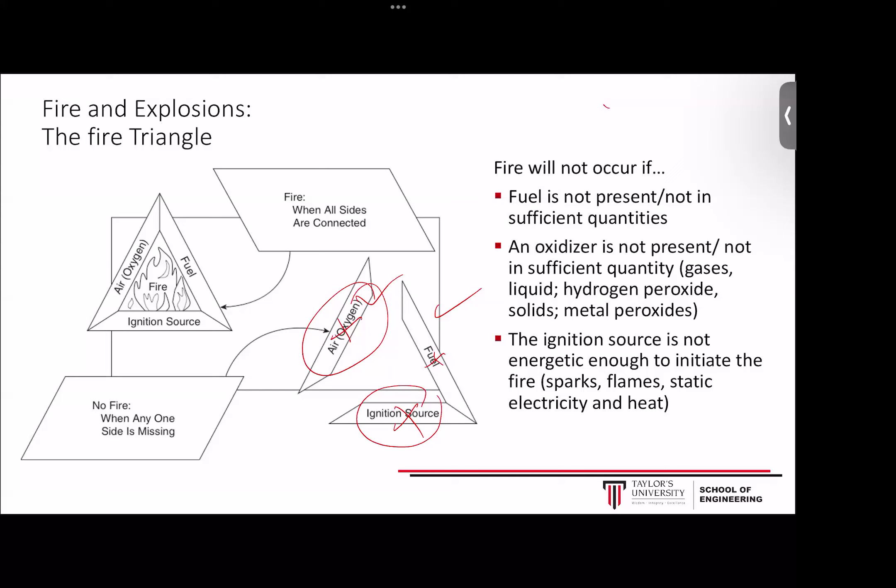So the difference between fire and explosion is that fire actually burns slow compared to explosion. Explosion is where the moment it started, what causes the damage is not the fire, not the burning, but the overpressure. It's caused by the pressure, okay? So fire releases energy slowly, explosion releases energy in an instant.

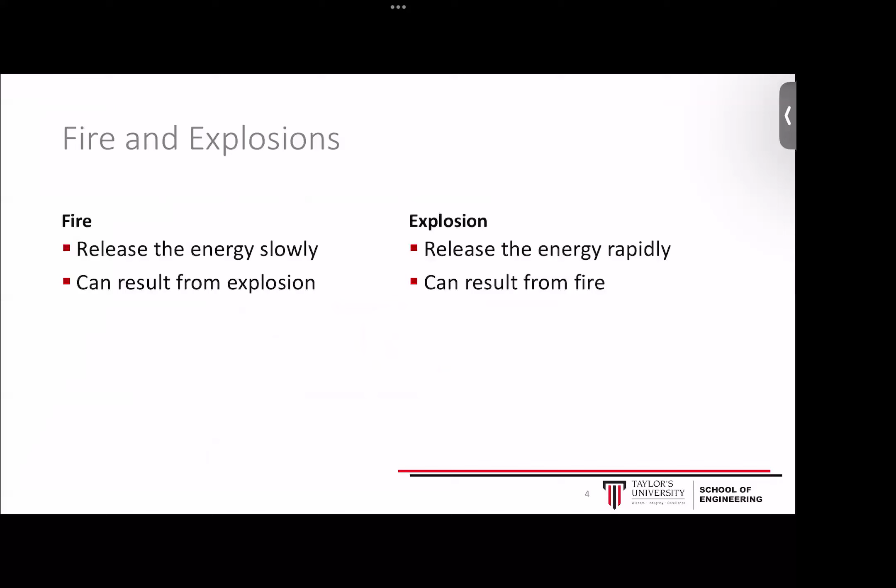Okay, so fire can result from explosions and explosions can result from fire. So they go hand in hand very often. Fire is a chemical reaction between substance and oxidants that releases energy.

And ignitions - something I want to bring to your attention is the auto ignition temperature, AIT, which is the certain temperature where the substance has enough energy to start a fire - you don't need a spark to start a fire. The fuel itself has enough energy to burn by itself.

So the flash point of a liquid is the lowest temperature where it starts to give off vapor to form the ignitable mixture with air.

Okay, so you have seen in your SDS, the ones that we already looked at - if you go to the fire properties, it will tell you the flash point, and for some substances, if they have the AIT, they will also tell you what the AIT temperature is.

Please pay attention to that, because I have seen students when it comes to their capstone design - your group projects 1 and 2 - since most of you chemical engineering students are taking this module together with your process plant design economics. Next semester you will start to design a chemical plant that's given to you. So I have seen students where they wanted to run their reaction at, for example, 400 degrees Celsius.

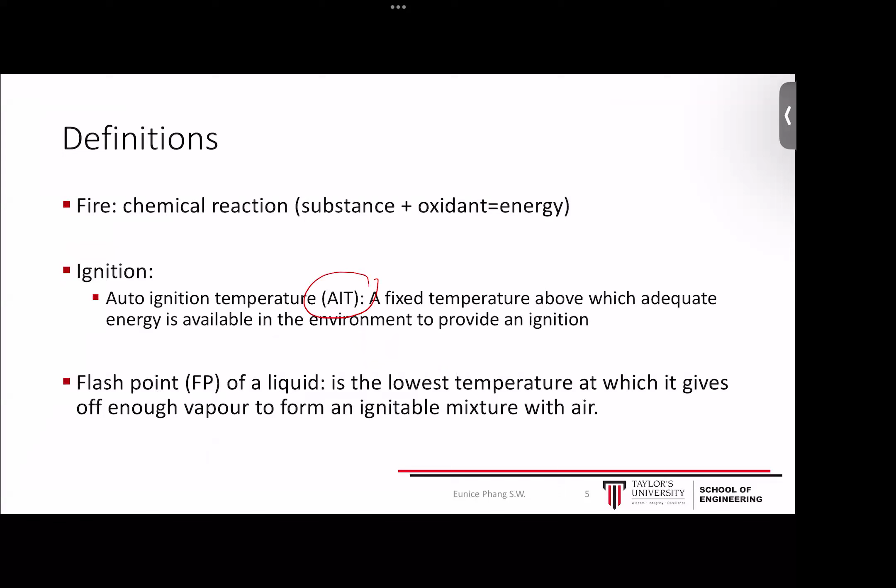Hold on, give me a minute, because I think I hear my son.

Okay, so there are lots of different types of explosions. When we say general explosions, it talks about chemical reaction explosions. But there are also things like mechanical explosion due to pressure buildup.

And also we have something called confined explosions, where it's within the building or within what we call the blast wall. And also the boiling liquid expanding vapor explosion - a very long, lengthy word for explosions that in general we call BLEVE.

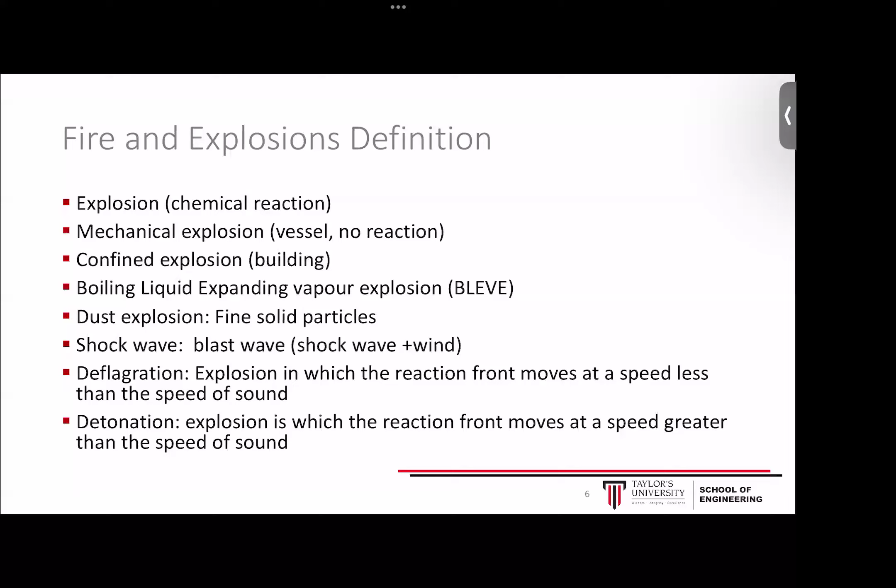Or dust explosions, which later we have videos talking about what dust explosion is. Even fine dust, when you accumulate enough of it, has the potential to cause explosion. And what's shockwave, and deflagrations and detonations, etc. So these are just basic fire and explosion definitions.

Okay, so let's take a look at this chemical reaction explosion that we had here. Just give me a moment to reshare the screen here.

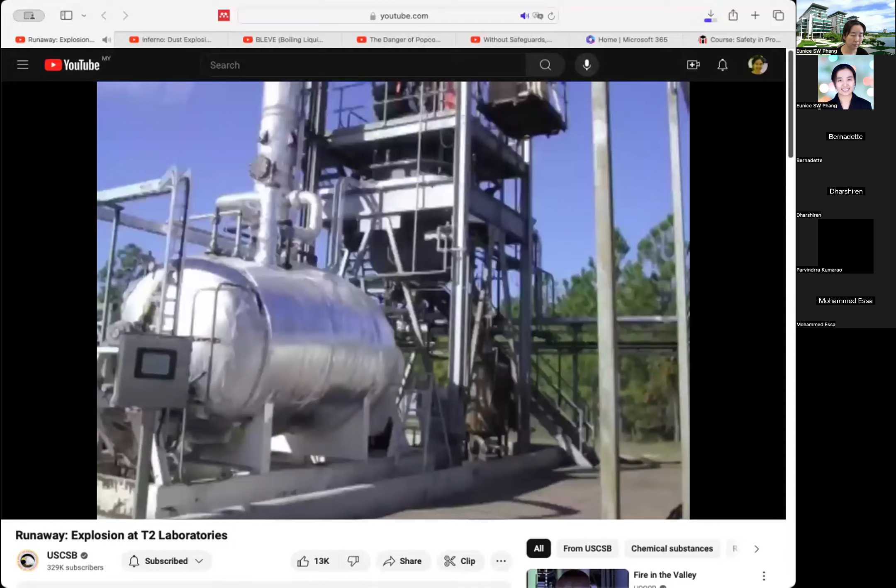Behind me on this concrete pad, there used to stand a structure some 50 feet high that had a reactor vessel in it, in which the company that operated here, T2 Laboratories Incorporated, manufactured a chemical known as methylcyclopentadienyl manganese tricarbonyl, or MCMT for short. The entire structure and reactor vessel were blown away in the explosion.

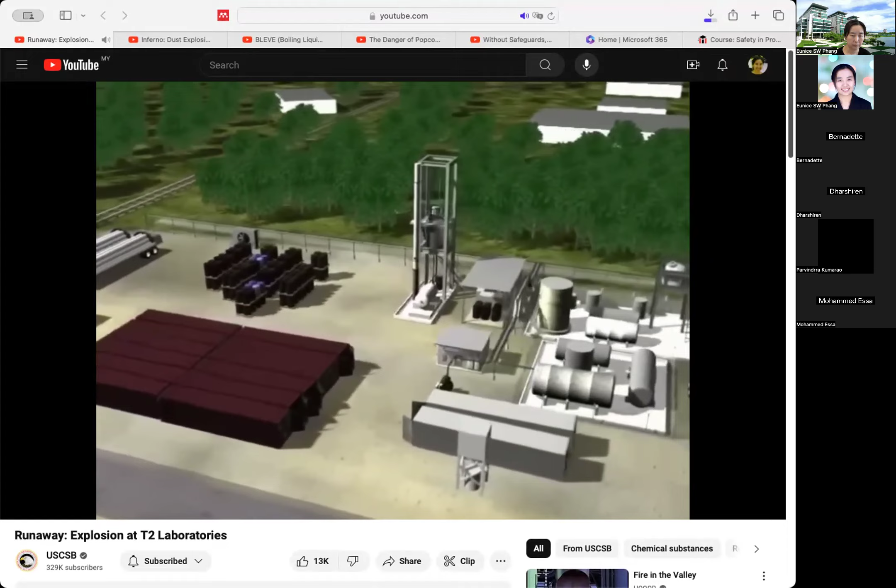T2 produced MCMT, a gasoline additive, in batches using a 2,500-gallon reactor. An operator controlled the process with a computerized system in a nearby control room. In the first step, liquid chemicals and sodium metal were loaded into the reactor, heated, and then mixed with an agitator.

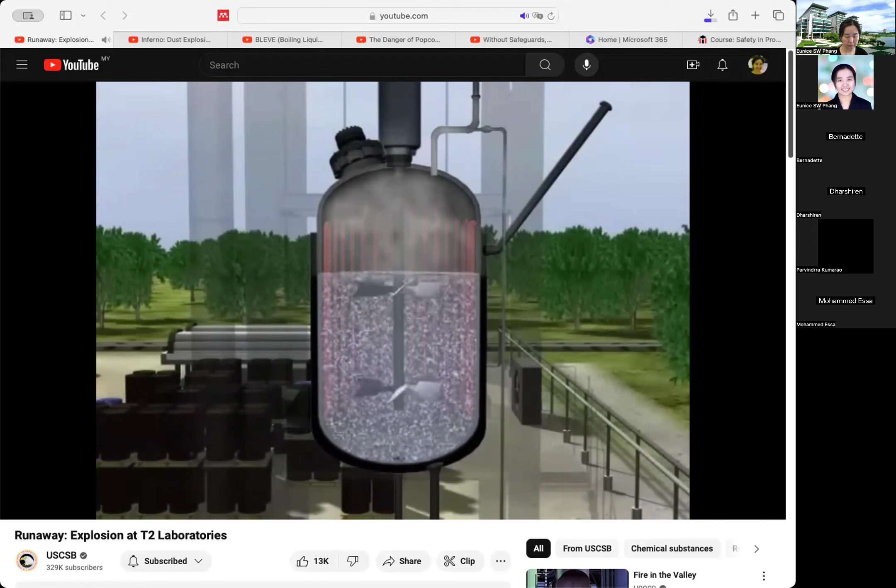The reaction produced hydrogen, which was vented to the atmosphere. In normal operations, when the temperature reached 300 degrees Fahrenheit, the operator would turn off the heating system. But because this reaction was exothermic, or heat-producing, the temperature inside the reactor would continue to rise. At 360 degrees, operators would begin to periodically fill the reactor's cooling jacket with water. As the water boiled, heat was removed, controlling the temperature.

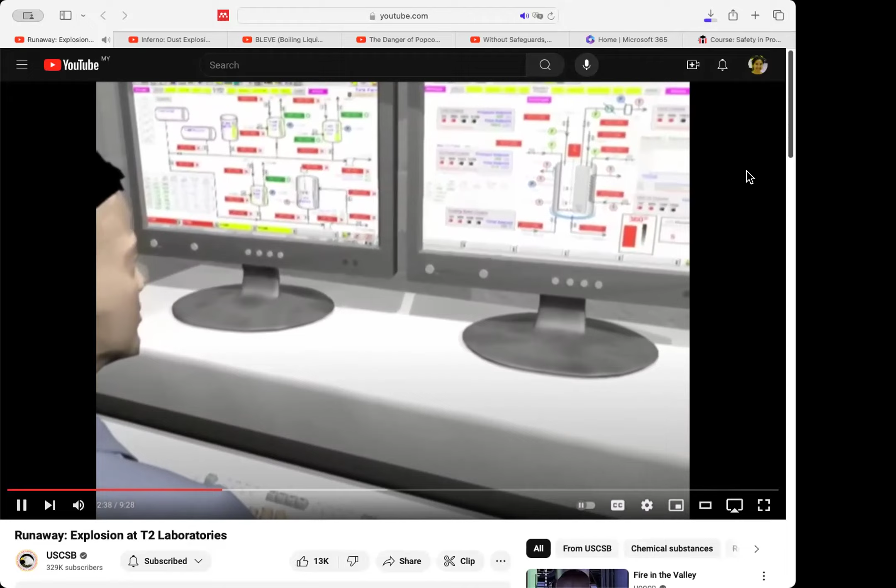However, on the day of the accident, the CSB found that the operator tried to cool the reactor as usual, but the cooling system likely malfunctioned, perhaps due to a blockage in the water supply piping or a valve failure. The temperature and pressure inside the reactor began to rise uncontrollably in a runaway chemical reaction.

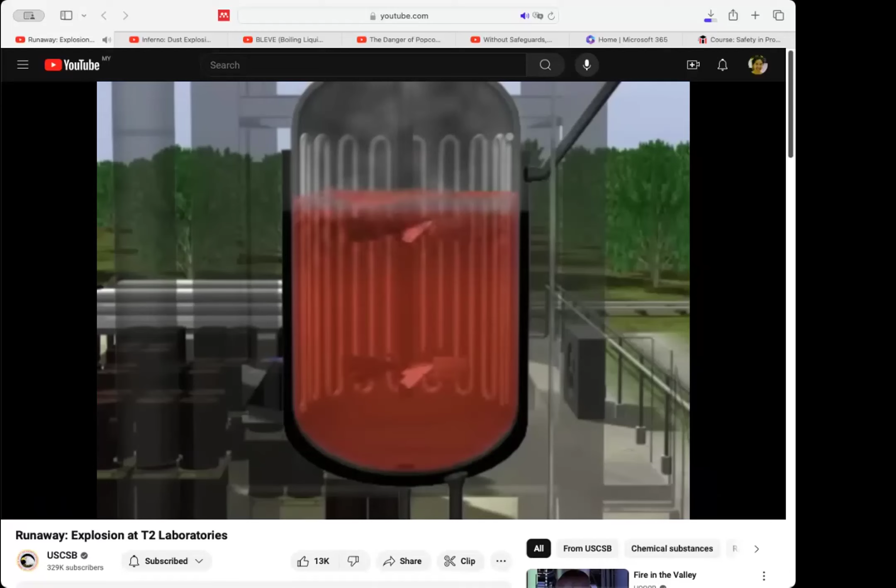T2's co-owners returned to the plant after a worker called to report the cooling problem. While one owner searched for the plant mechanic, the other went to the control room. Concerned about a possible fire, he warned employees to move away from the reactor.

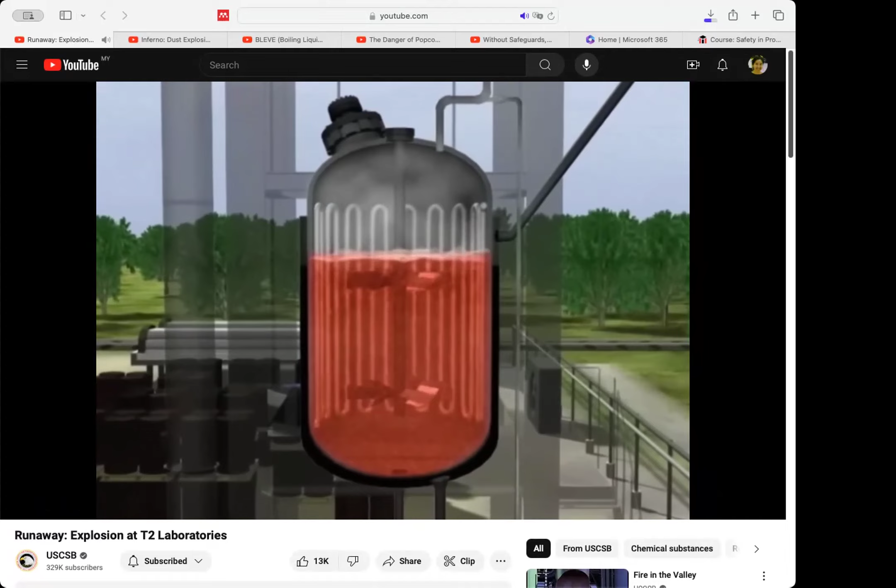Inside the reactor, the pressure was still increasing, reaching 400 pounds per square inch and bursting the rupture disc. Witnesses heard a sound like a jet engine as high-pressure gas began to vent from the reactor. But it was too late. Within 10 seconds, there was a massive explosion, equivalent to about 1,400 pounds of TNT.

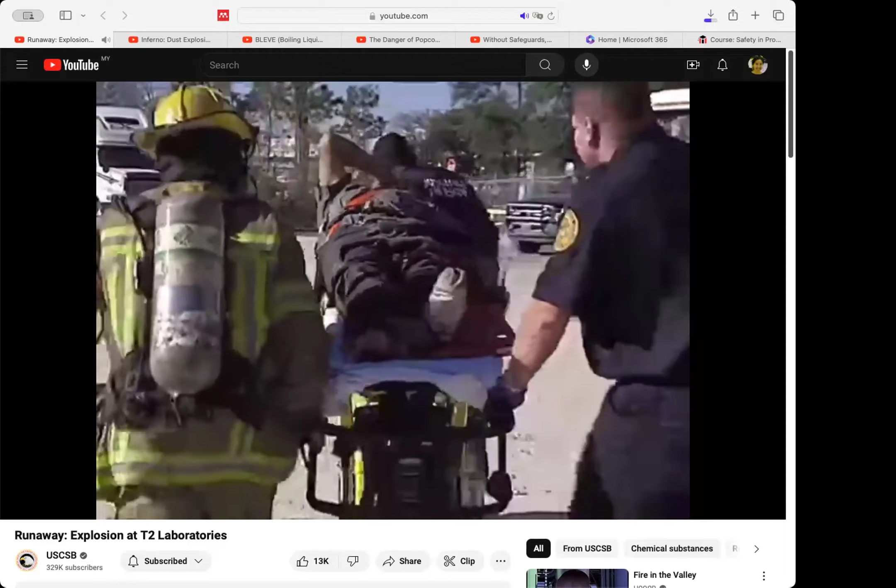The blast damaged buildings over 1,500 feet away. Debris rocketed up to a mile. The co-owner and the operator in the control room were killed. 2 operators further away died from flying debris. 32 other people were injured, including 28 at nearby businesses.

This facility housed multiple types of chemicals. That was a kind of a mass storage of everything you can think of, and it was all mixed together and it was all burning together. And for our perspective from the hazardous material side, it makes kind of a worst case scenario.

Damage from the explosion was so severe, 4 nearby buildings were condemned. My office personnel heard a whistling sound in the area, and as they looked out the window, they saw an orange glow, which was the blast coming off of the explosion, and it came to our offices and it blew in all the windows in our office trailers. Immediately it was a shock or a surprise, and then all of us were shaken afterward.

In 2002, the CSB completed a study on reactive chemical hazards. The study identified 167 serious accidents involving uncontrolled chemical reactions between 1980 and 2001, causing 108 deaths and hundreds of millions of dollars in property damage. When mixing chemicals that have an exothermic reaction, you need to be aware of the amount of energy that could be released by the reaction to prevent vessels from bursting like the one that happened here.

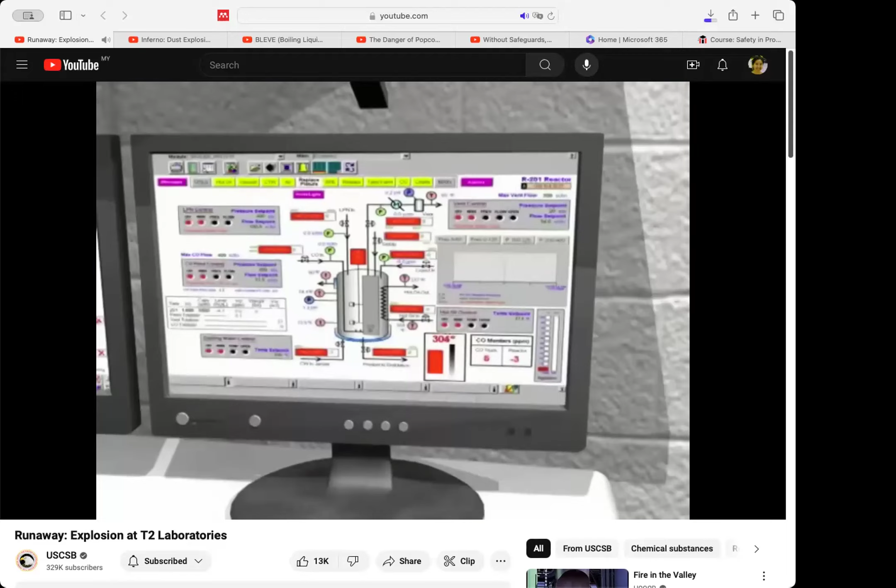T2 developed its MCMT process using a 1-liter reactor. The company then scaled up the process directly to full production volume in the 2,500-gallon reactor. After 3 batches, T2 increased the batch size further by 1/3. As the scale of the reaction increased, effective cooling became ever more difficult.

During 175 production runs making MCMT, T2 periodically experienced problems, such as unexpected temperature increases, but the company never fully investigated the causes. And T2 had only equipped the reactor with a simple cooling system using city water. When the system malfunctioned, there was no backup cooling immediately available to control the reaction.

The most important thing to managing reactive chemistry hazards is that you have to have a thorough and complete understanding of your chemistry under design conditions and also under all foreseeable abnormal conditions.

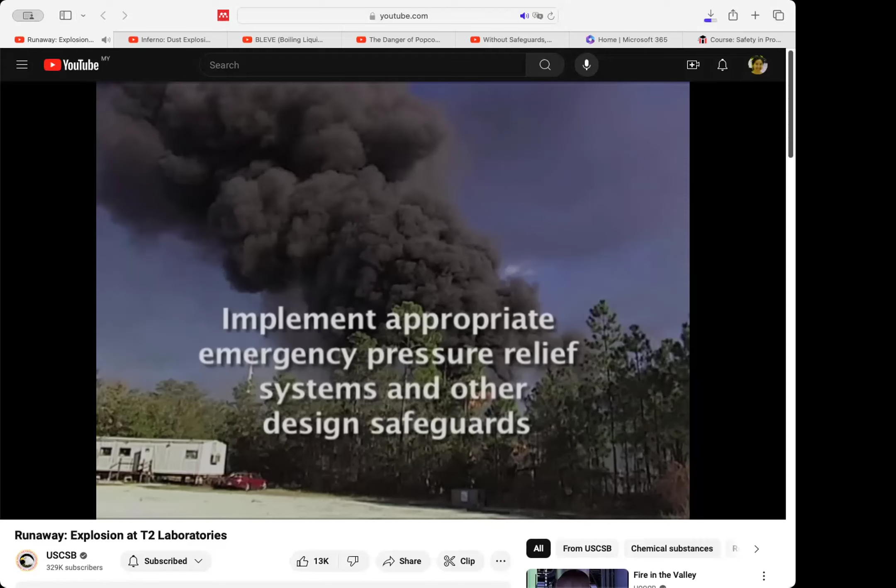The CSB has noted that to prevent reactive chemical accidents, companies should identify and thoroughly evaluate reactive hazards in their processes, implement appropriate emergency pressure relief systems and other design safeguards, develop effective operating procedures and training programs, and carefully manage any changes to existing processes, and plan for possible accidents, including evacuation drills and emergency response exercises.

Although T2's owners had undergraduate degrees in chemistry and chemical engineering and experience in the chemical industry, neither had been trained on how to recognize or control reactive hazards.

A large portion of the incidents have occurred because the people who were actually running the process were not aware either of the existence of the reactive chemistry hazard or of the potential magnitude of the consequences associated with that chemical reaction hazard. So a lot of the problem, I think, is education and awareness.

The board noted that multiple sources of information are available on how to control reactive hazards, including publications from the Center for Chemical Process Safety, the Design Institute for Emergency Relief Systems, and the UK Health and Safety Executive.

Following the T2 investigation, the CSB recommended that the American Institute of Chemical Engineers work to incorporate education about reactive hazards into college-level chemical engineering curricula.

Reactive chemical hazards continue to be a too frequent cause of chemical accidents. Improved industry practices and increased education will help prevent these tragedies.

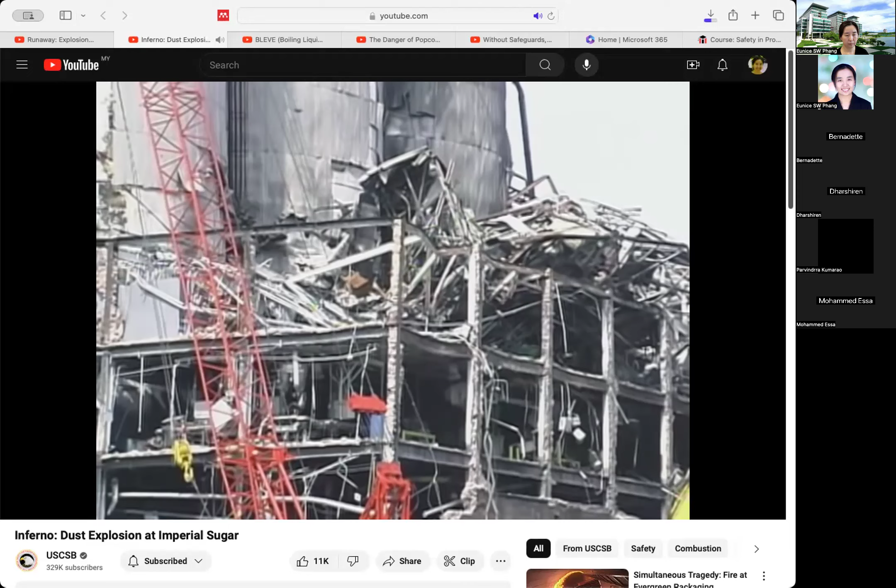At 7:15 p.m. on February 7, 2008, a series of violent sugar dust explosions devastated the Imperial Sugar Refinery in Port Wentworth, Georgia, just outside Savannah. Explosions raced through the buildings, fueled by accumulations of combustible sugar dust and sugar that had spilled from equipment. Thick concrete floors heaved up, and brick walls were blown into stairwells and work areas, blocking many exit routes. Fires spread rapidly.

8 workers died at the scene. 6 more died later at a regional burn center. Dozens of others were injured. The plant's massive sugar packing buildings were a total loss. The accident at Imperial Sugar was the deadliest industrial dust explosion in the United States in decades. It highlights the extremely serious nature of combustible dust hazards. There were significant accumulations of sugar dust and spilled granulated sugar on surfaces throughout this facility. Conditions were set for a catastrophic accident.

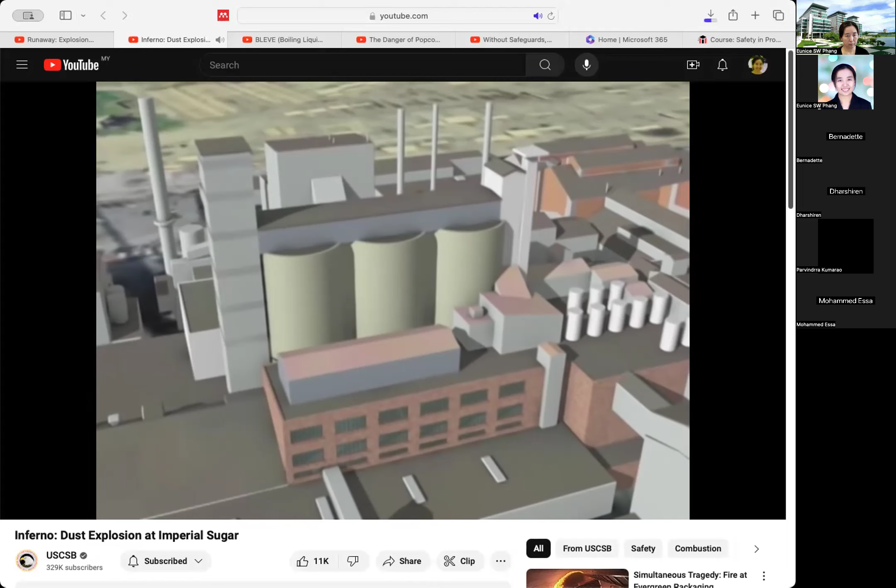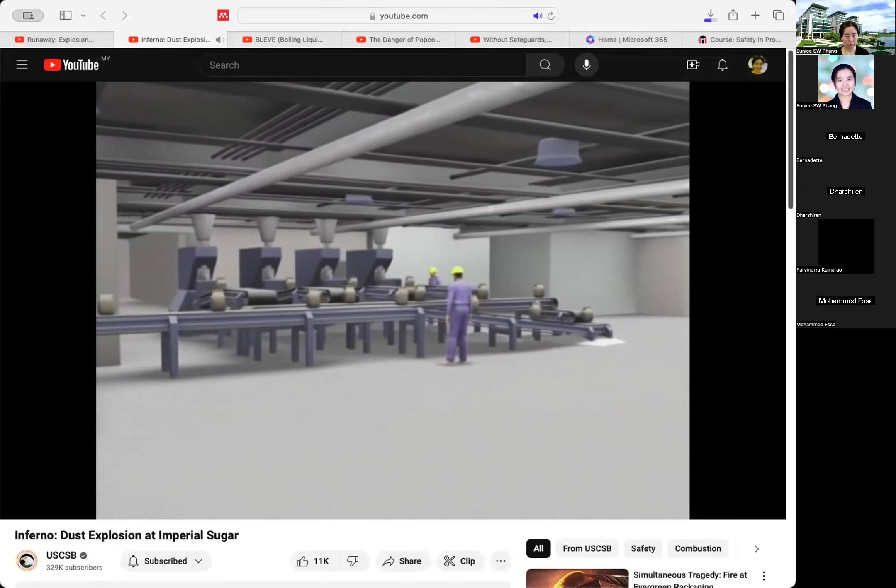Imperial Sugar's sprawling Port Wentworth complex began operations in 1917 and grew to become one of the largest sugar refining and packaging facilities in the U.S. Granulated sugar from the refinery was stored in 3 105-foot-tall silos and then conveyed into packing buildings where it was packaged for distribution. Granulated sugar was also converted into specialty products, such as brown sugar and powdered sugar. Sugar was transported by a complex system of bucket elevators, screw conveyors, and conveyor belts.

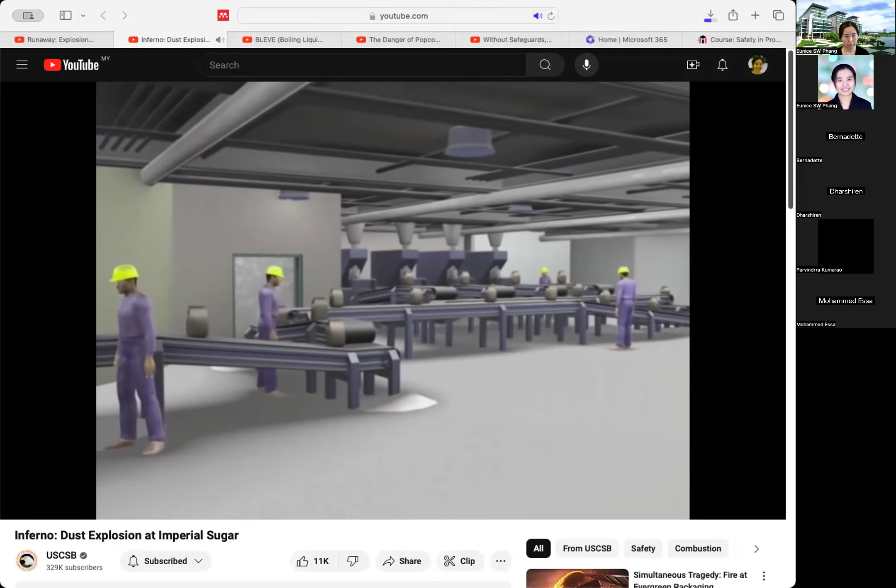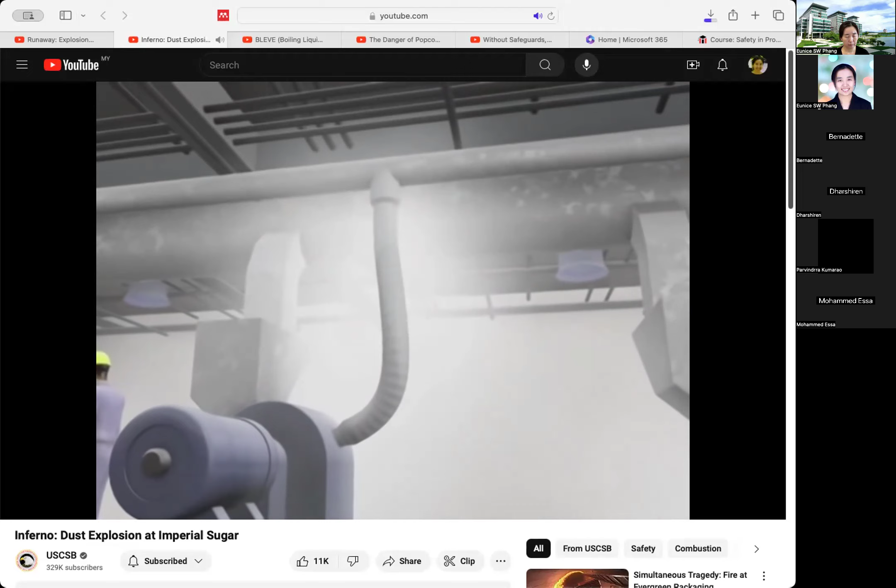During this process, sugar spilled onto floors throughout the work area. In places, the spilled sugar was many inches deep. This sugar also contained fine particles which became airborne. In addition, hammer mills were used to crush the granulated sugar into powdered sugar, creating even more dust. The machines were connected to a dust collection system, but it was undersized and in disrepair. And it was not connected to the bucket elevators and conveyors.

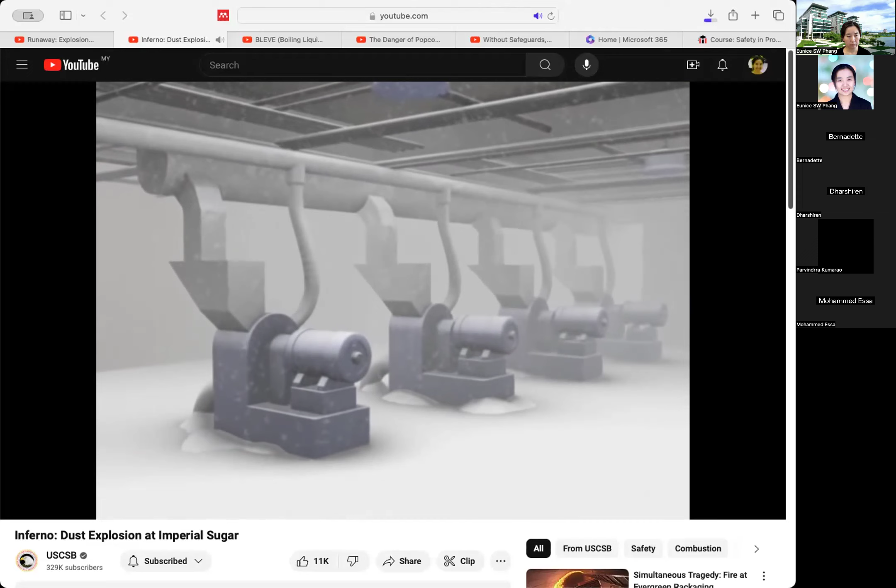Significant amounts of sugar dust escaped into the work areas. Workers routinely used compressed air to clean packaging machines, further dispersing sugar dust throughout the buildings. Over time, large amounts of dust accumulated on elevated, hard-to-clean surfaces, such as ducts, beams, and light fixtures. These surfaces were not cleaned often enough to always keep the dust below hazardous levels.

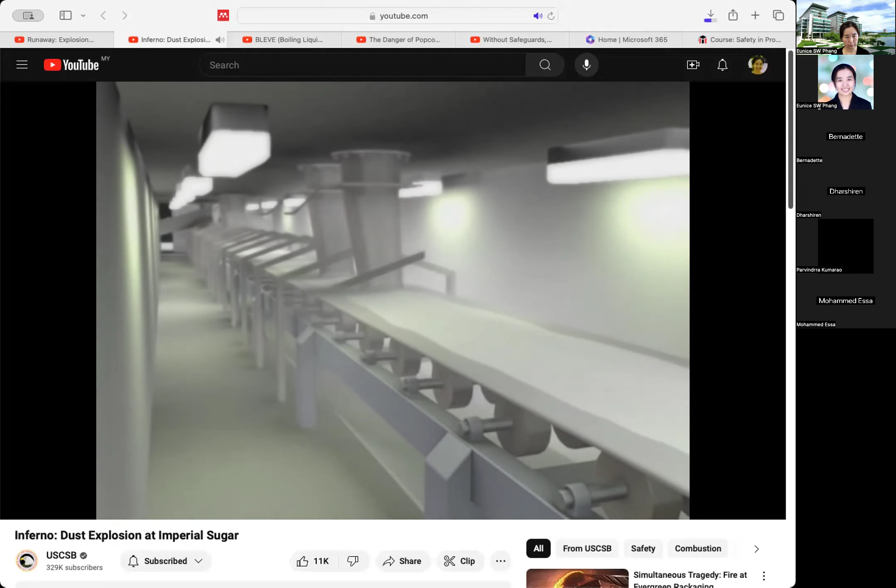However, in 2007, the company enclosed the conveyor belt with stainless steel panels to protect the sugar from possible contamination. The enclosure was not equipped with a dust collection system. As a consequence, sugar dust would now be trapped inside this enclosure.

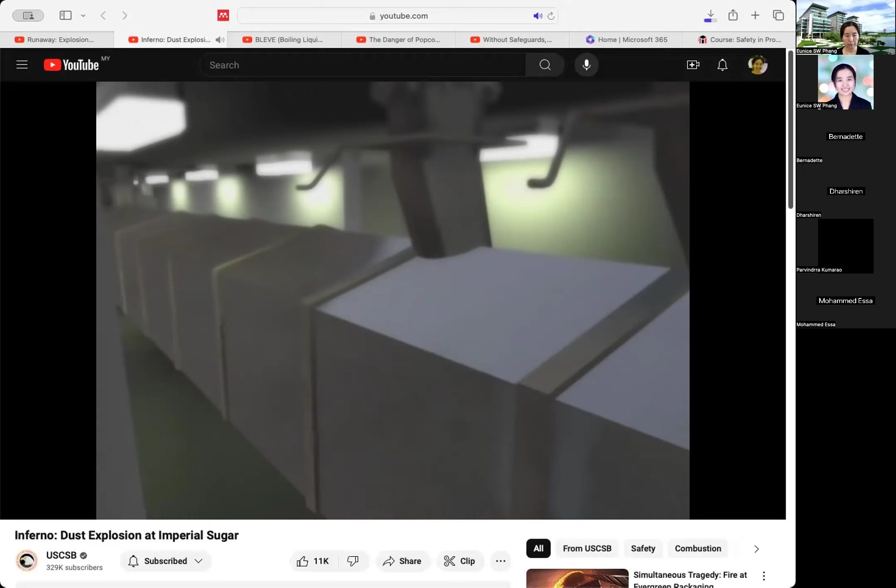On February 7, 2008, clumps of sugar were found blocking one of the discharge chutes. Sugar from the adjacent silo likely spilled off the moving belt. Dust likely accumulated to an explosive concentration inside the enclosure. At about 7:15 p.m., the sugar dust contacted a nearby ignition source, likely an overheated bearing, and exploded.

This primary explosion blew apart the enclosure and vented into the packing building. Accumulated sugar was lofted and ignited by the advancing fireballs. The dust clouds fueled a chain reaction of secondary explosions, which swept through the buildings. Concrete floors buckled, releasing tons of granulated and powdered sugar into the flames.

Emergency evacuation drills had not been conducted, and the explosions had cut the power to much of the interior lighting. In the maze of darkened and damaged stairwells and passageways, workers desperately tried to flee the growing inferno.

The CSB found that correspondence dating back to the late 1960s showed that plant managers in Port Wentworth were aware of the explosive nature of sugar dust and the danger of dust accumulations. As far back as 1967, a memo described a sugar dust explosion that heavily damaged the powdered sugar mill room. Despite the long-standing awareness of the explosive nature of sugar dust, not enough was done to manage the hazard.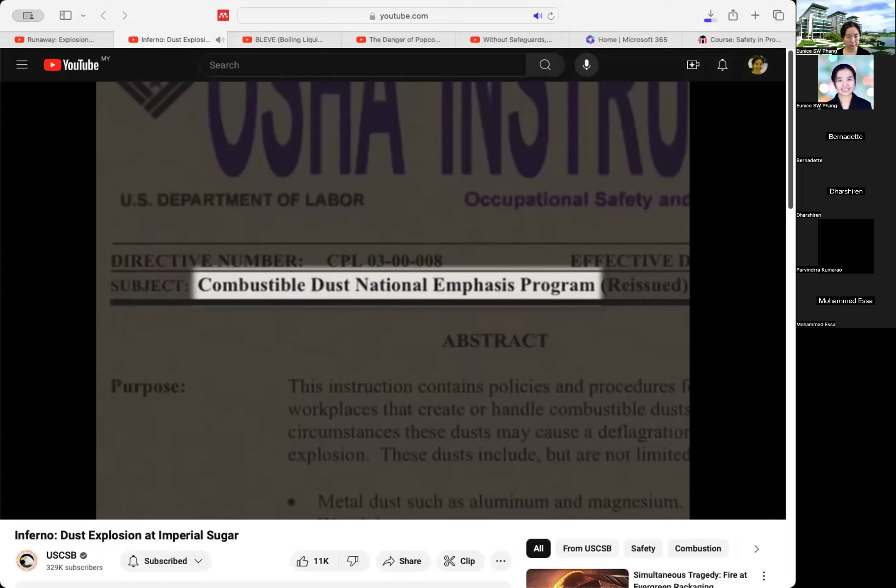In 2006, the CSB issued a study of combustible dust, which called on OSHA to establish a comprehensive combustible dust standard based on the current standards of the National Fire Protection Association, or NFPA. In October 2007, OSHA began implementing a new national emphasis program to increase the enforcement of existing regulations related to combustible dust. Imperial Sugar learned of the OSHA Combustible Dust National Emphasis Program 4 months before the devastating explosion at Port Wentworth. But management did not act effectively to control the serious dust problem in the packing buildings.

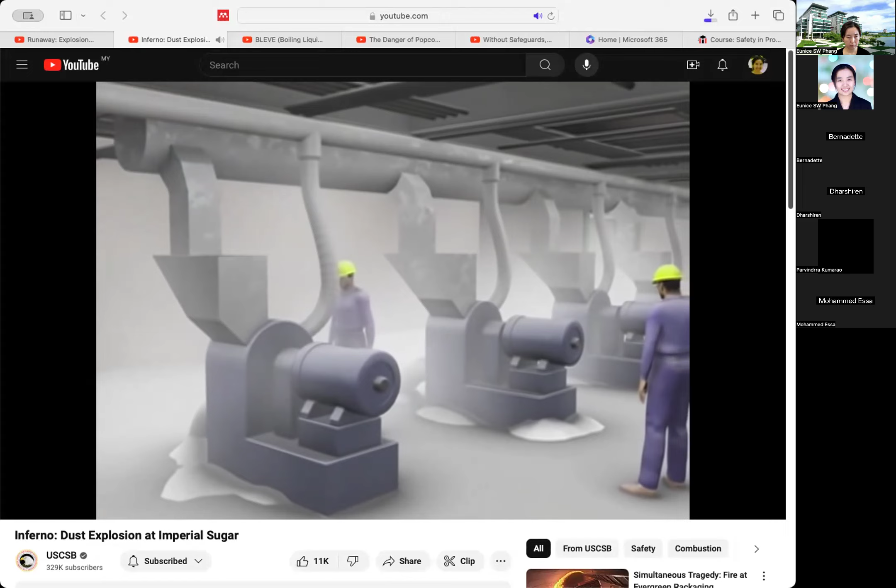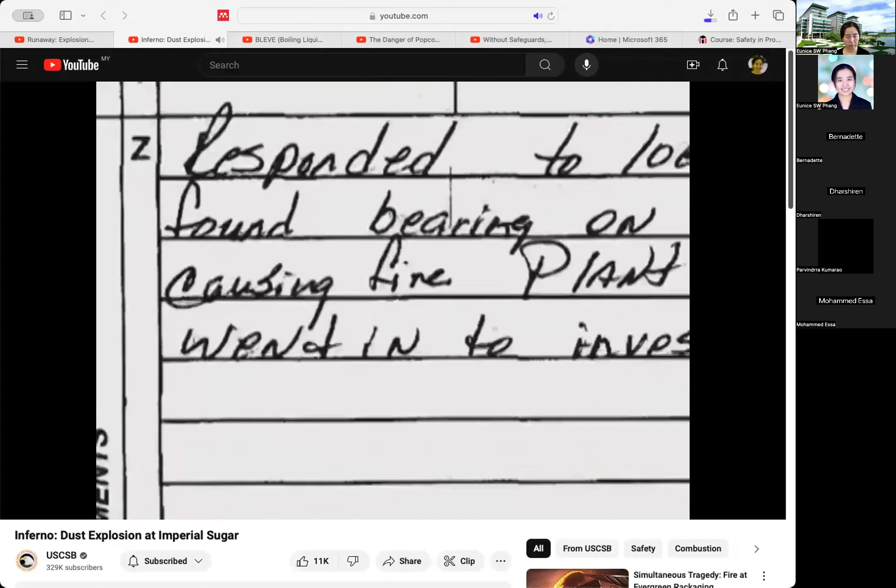Less than 2 months before the disaster, an internal inspection showed that many tons of sugar were still regularly spilling onto the floors. This provided much of the fuel for the massive secondary explosions and fires. The CSB found that over the years, the Port Wentworth facility periodically experienced small fires fueled by spilled sugar and accumulated dust on equipment. But none resulted in a sugar dust explosion that propagated through the plant. Investigators said that decades of operating without a catastrophic explosion may have lulled managers into complacency.

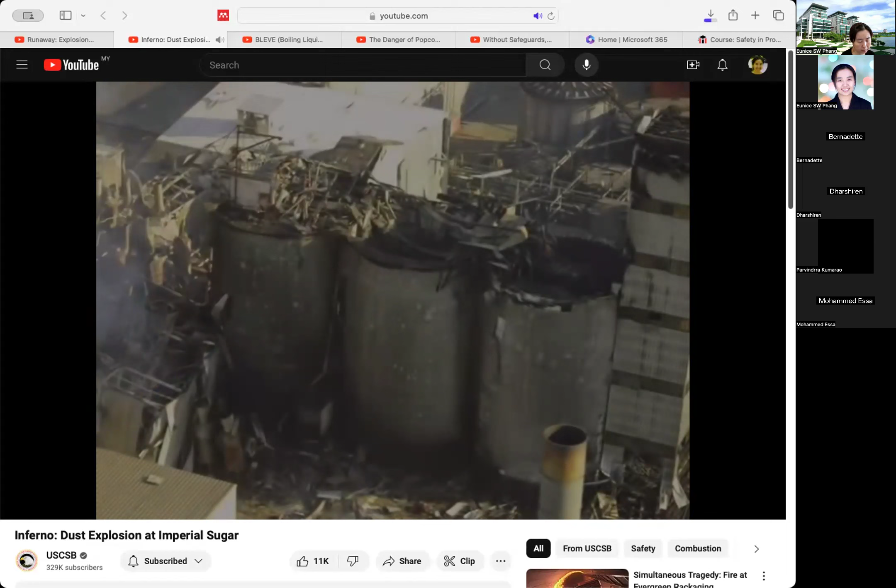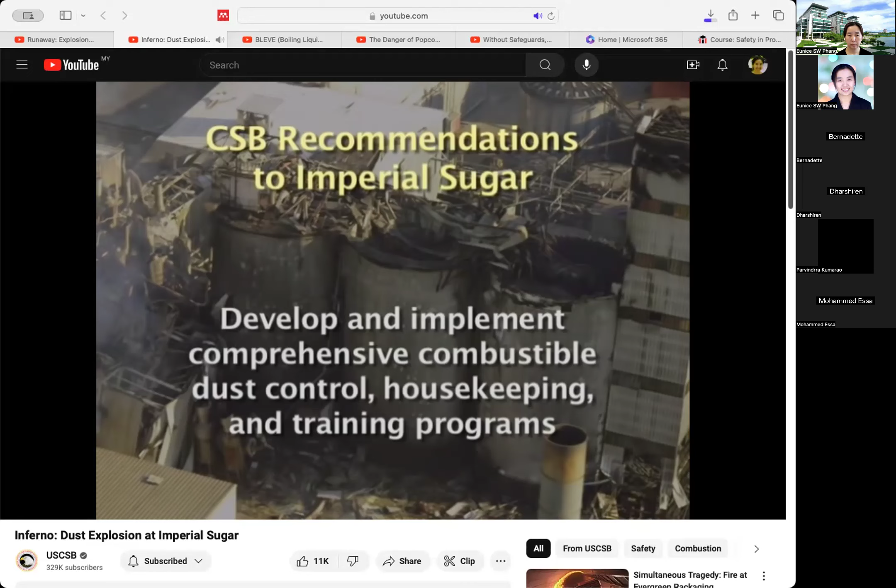In its report, the CSB issued the following recommendations to the Imperial Sugar Company. Apply NFPA standards to the design and operation of the rebuilt Port Wentworth facility. Develop and implement comprehensive combustible dust control, housekeeping, and training programs. Improve emergency evacuation policies and procedures.

Companies can go a long way to control combustible dust within their own facilities by following the existing recommendations of the National Fire Protection Association. But it is also time for a comprehensive federal standard on combustible dust. In April 2009, OSHA announced plans to begin rulemaking on a combustible dust standard for general industry. In its final report on the Imperial Sugar accident, the CSB recommended that OSHA move forward expeditiously with the new standard. Without regulation, enforcement, and education, workers will continue to be at risk from catastrophic dust explosions.

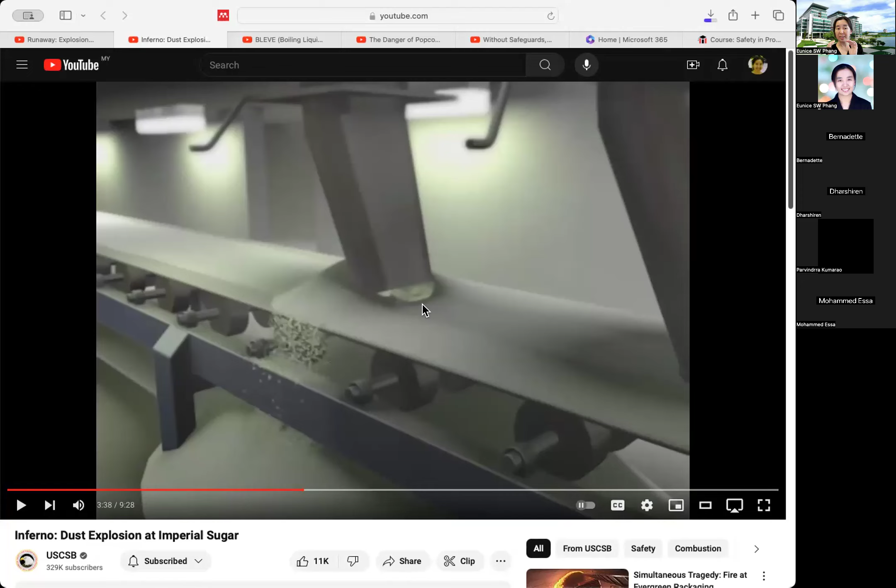So when they put up the tunnels to reduce contamination, what happened is that the dust piled up inside the tunnels, reaching the flammable limits of dust inside this tunnel, to the level of explosive. So the moment they have this clump in there, they suspect the overheating of the belt caused the sparks to happen, because these are all conveyor belts.

So with conveyor belts, as we know, if they continue to run, they start to generate heat, and sometimes sparks may just happen. So that's where the whole explosion started. It's not started by the fire, but it started as an explosion. Okay, so any questions regarding these two?

On the fire and explosions, the explosions caused by chemical runaway, and the other one caused by dust.

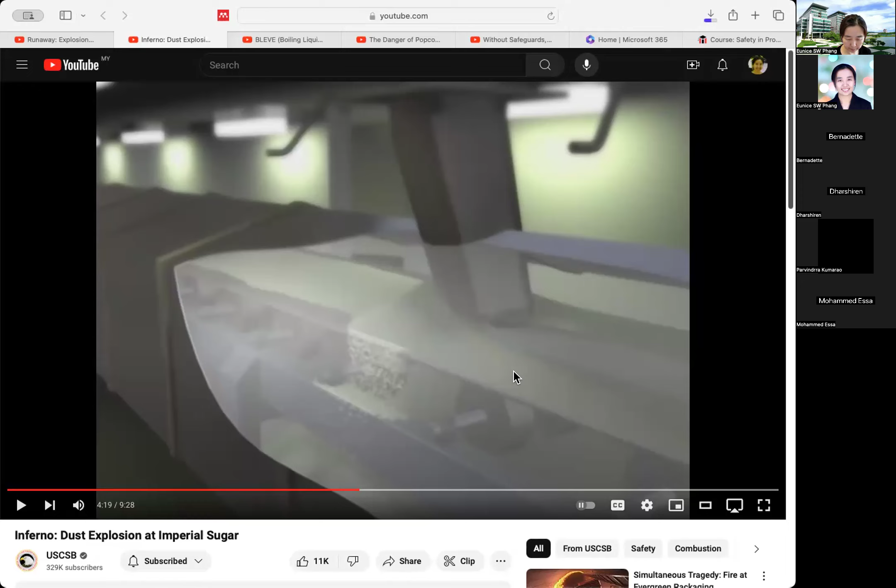Okay, let's see, share device audio. Okay, let's go back to my PowerPoint.

Okay, so just now we viewed the chemical reaction explosion, followed by the dust explosion. A lot of us always thought that only chemicals can start fires, but dust explosions do happen, especially in food processing plants, like flour plants, cornflour, or any processing plant that has fine particles at risk.

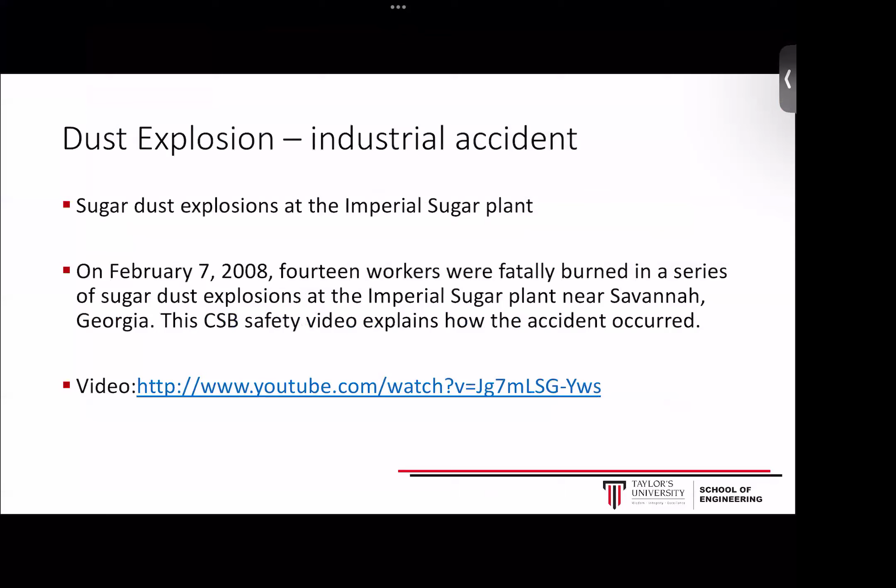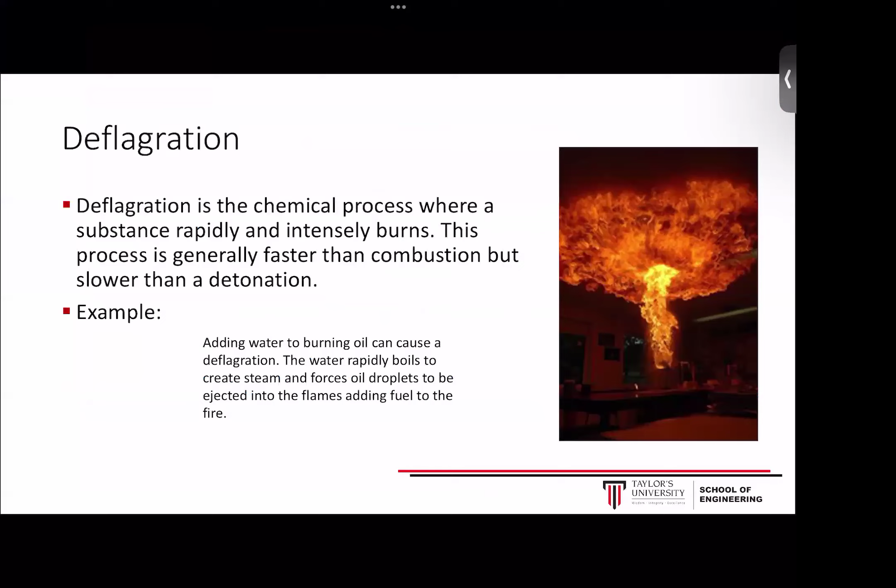Next, we're going to talk a little more about deflagration versus detonation. Deflagration is where there is burning, a fire, and when we add a substance that makes the process suddenly burst out, faster than combustion but slower than detonation. A good example is adding water to burning oil, which can cause a mushroom-like fire. The water droplets get vaporized because of the high heat, and that carries the fumes all the way up. That's what we call deflagration.

Detonation basically is a shock wave caused by the explosion, greater than the speed of sound. Deflagration is lower than the speed of sound; detonation travels faster than the speed of sound. When we look back at these two videos, the moment the explosion happens, it was like detonating a bomb. There's no time for people to react. When there is a fire, there's time for people to evacuate. But when the explosion hits, there's no way people can run.

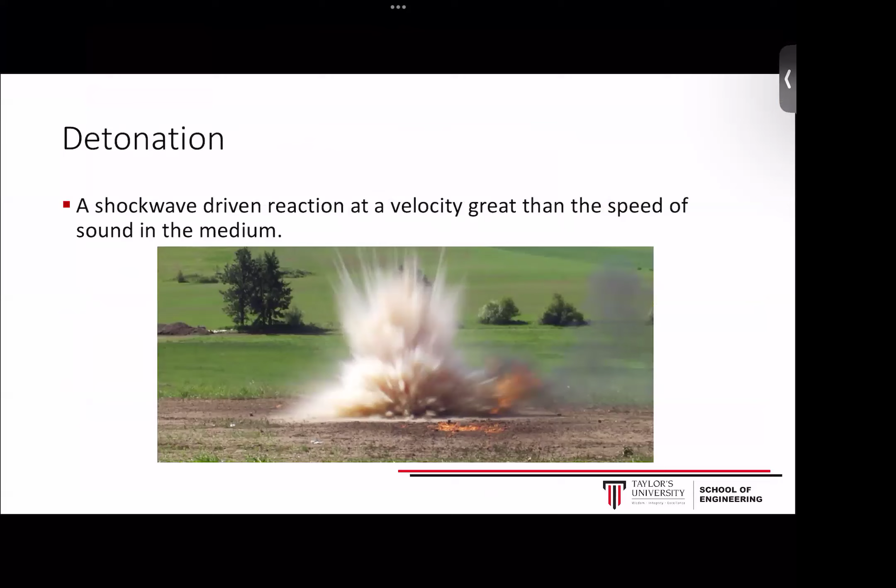That is why explosion-proof walls are very important wherever we design a plant that has the potential for explosions. Later on we are going to talk about flammability limits. What you're looking at is the official setup for the flammability study of liquid and vapor. We are not going into detail. This is more an introduction on how people get the upper flammability limit and the lower flammability limit. This is mainly done by OSHA and the EPA, the Environmental Protection Agency, who have joined hands to study the flammability limits of all the chemicals.

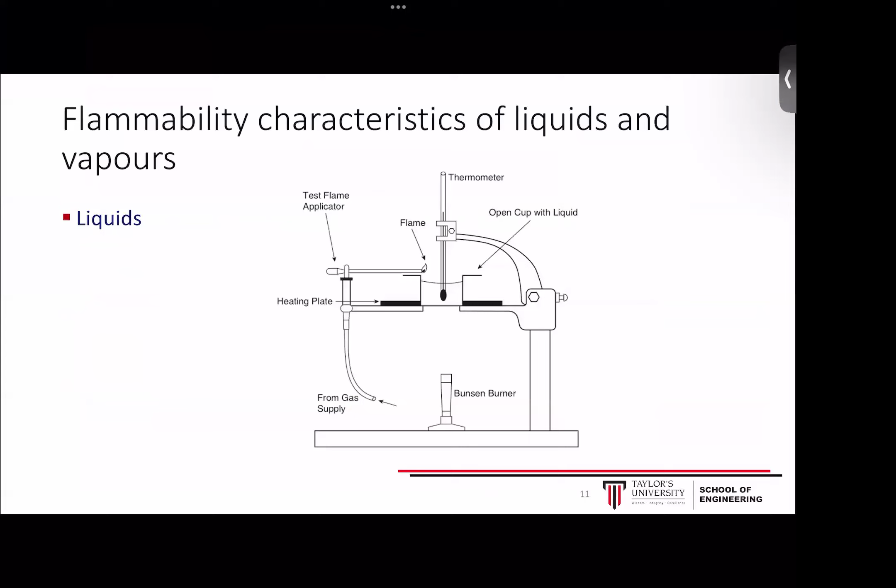Basically they talk about the vapor mixture, and it varies; it increases with temperature as well as pressure. So this is a simple graph. Some of you may have seen something similar but different in your CET, Chemical Engineering Thermodynamics module, where we talk about the three-phase study. Over here, we look at the flammability study.

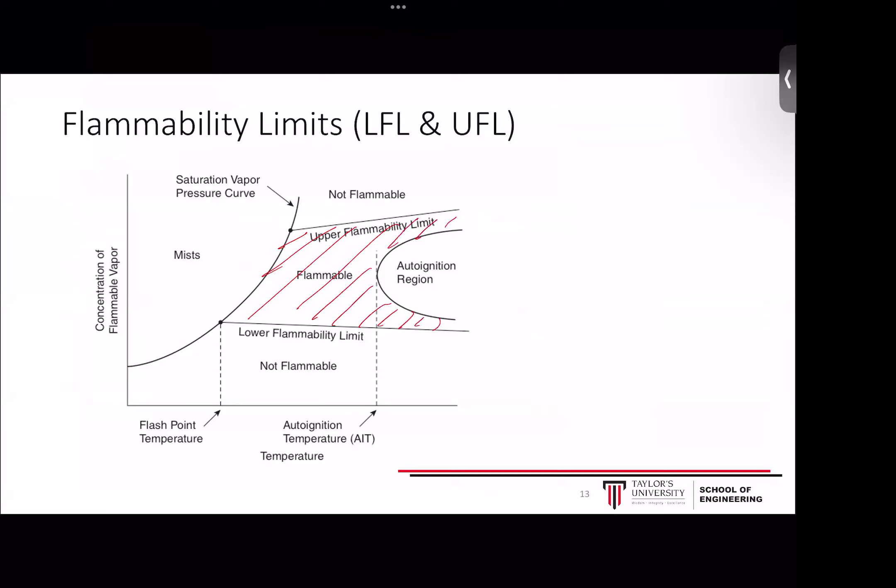Anything between this curve over here is flammable. Anything outside, let me change to a different color, over here or over here, either you do not have sufficient oxygen present in the environment to cause it to burn, or, over here, not enough fuel. This one is mainly not enough O2.

Anything in between this area, you will have enough O2 and enough fuel, and the moment you have sparks or an ignition source, the fire will happen. However, if you are in this region, allow me to use a different color, this is where you don't even need sparks. It will start to burn. These are the regions we call the auto-ignition region. This is being calculated.

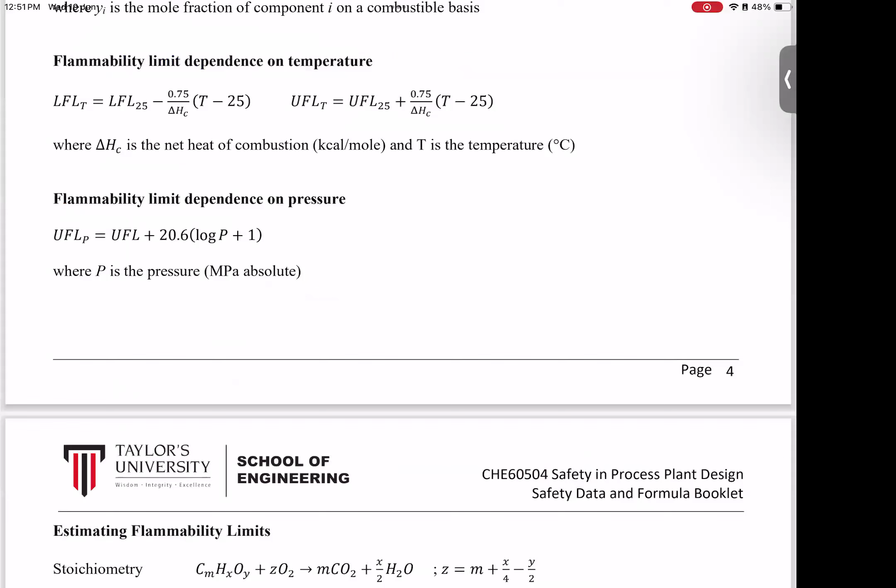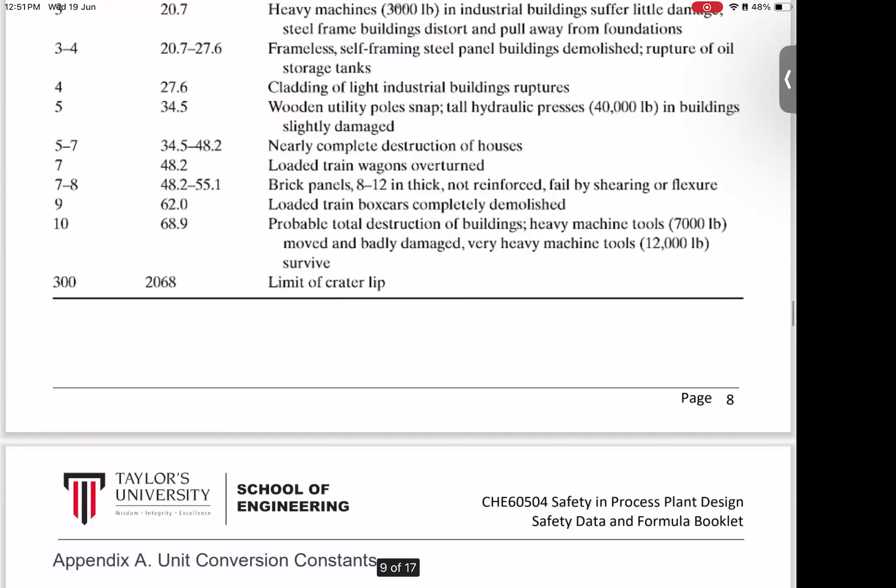So whenever we have this data, let me go to our data booklet. What you're looking at is the booklet we always refer to. Formulas for fire and explosion are all given in here. So let's go to the data. Later on we are going to talk about all this data, but let's go to the flammable limits data here that you can see.

So, apparently I have difficulties.

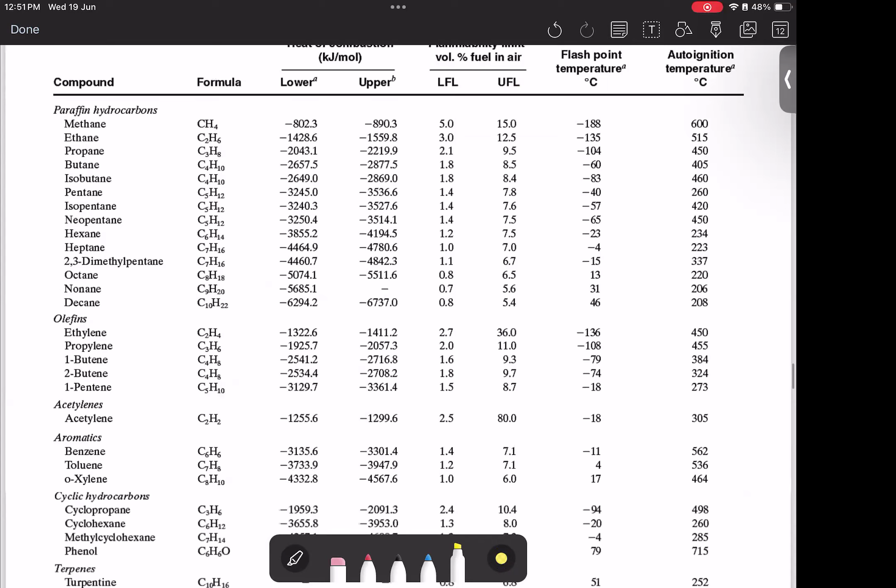Okay, so this is where all the data - you can see methane, ethane, propane, and all these flammable chemicals - they have tested what are the levels. So you have a lower flammability limit and upper flammability limit in the air. We are not concentrating on the liquid form, but on the percentage, volume percent of the fuel in the air, because that's the one that's actually burning.

In order to calculate, because in a chemical lab sometimes we have multiple chemicals, or in a workplace, we need to calculate the vapor mixture. So these are the chemicals and the formulas to use. LFL mixture is 1 over the sum of Y, which is the mole fraction of each component on a combustible basis, over the flammable lower or upper flammable limit of each of the components. So these are just the calculation part.

Next week, we are going to do a lot of LFL and UFL calculations on Wednesday during our tutorial slots. So today is mainly on theory on fire and explosions. Then next week we are going to talk about the calculations. So do not miss the class next week, yeah?

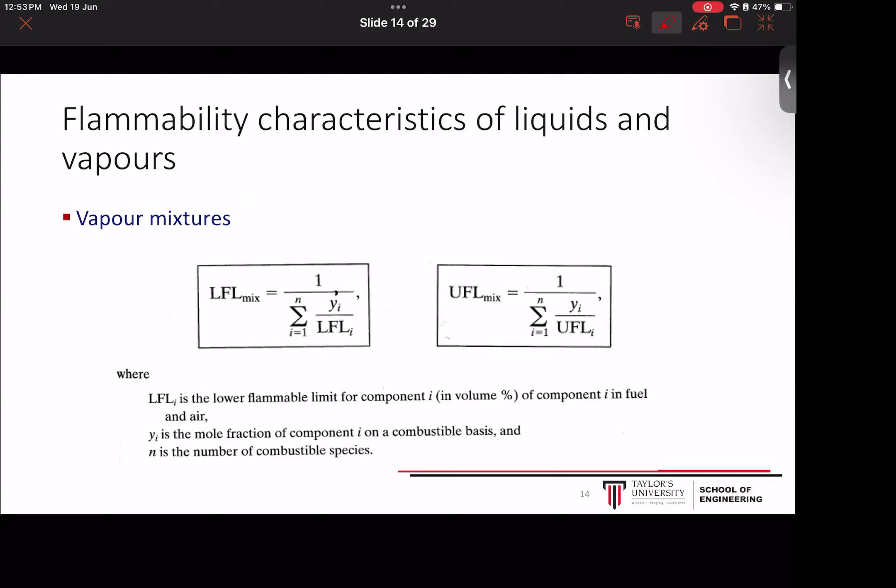So this calculation is based at 25 degrees Celsius, which is what we call standard room temperature. All this data you see here is actually done at 25 degrees Celsius room temperature. However, I did mention that the flammability limit actually increases or changes according to temperature and pressure. So when we have an increase of temperature, we have to make sure this temperature is in degrees Celsius. Also, this is the net heat of combustion in kilocalories per mole.

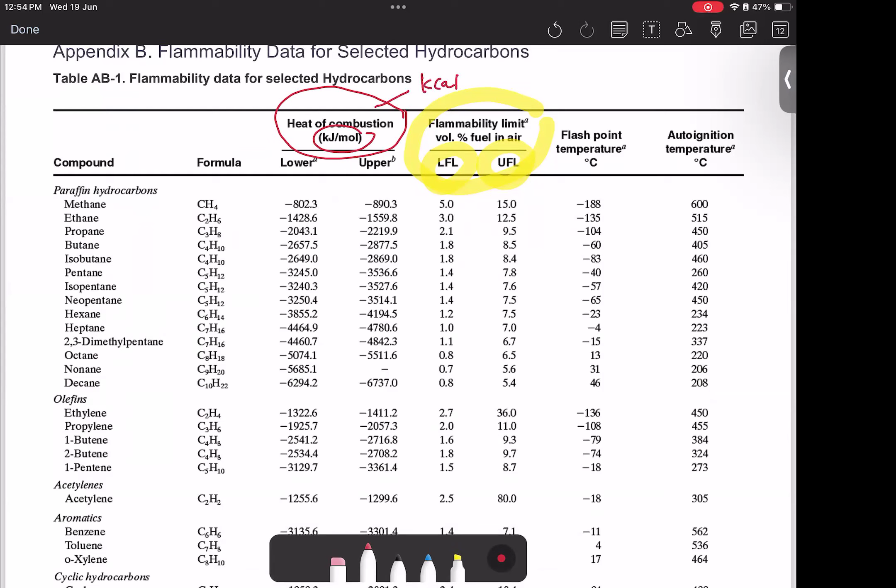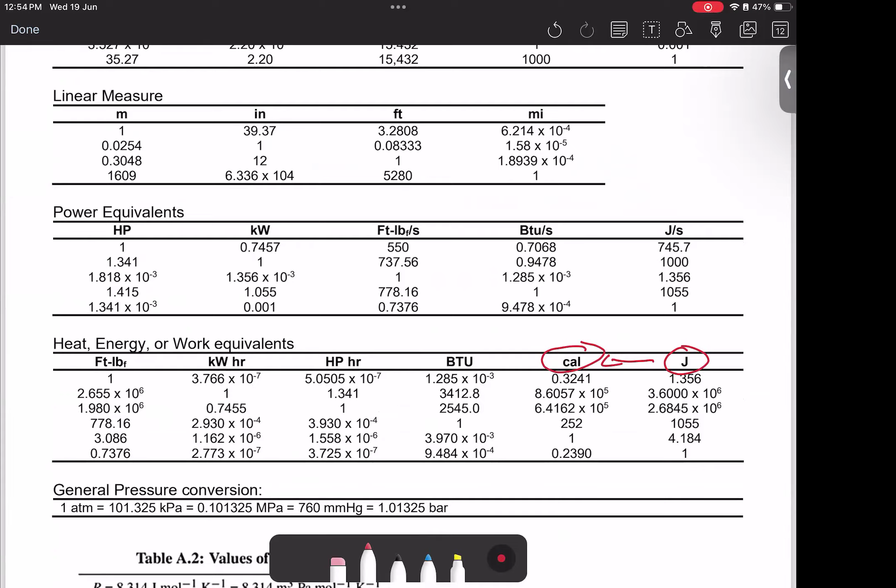So where do you get this data? Come back to this one. However, you have to note that this is in kilojoule per mole - we need to convert this to kilocalorie per mole. How do we do that calculation? That is why I have given you the unit conversions table right before this one. So you can calculate in terms of joule to calorie. You just use the conversion: 1 joule is equal to 0.239 calorie. So you just multiply this by 0.239 and you get the level.

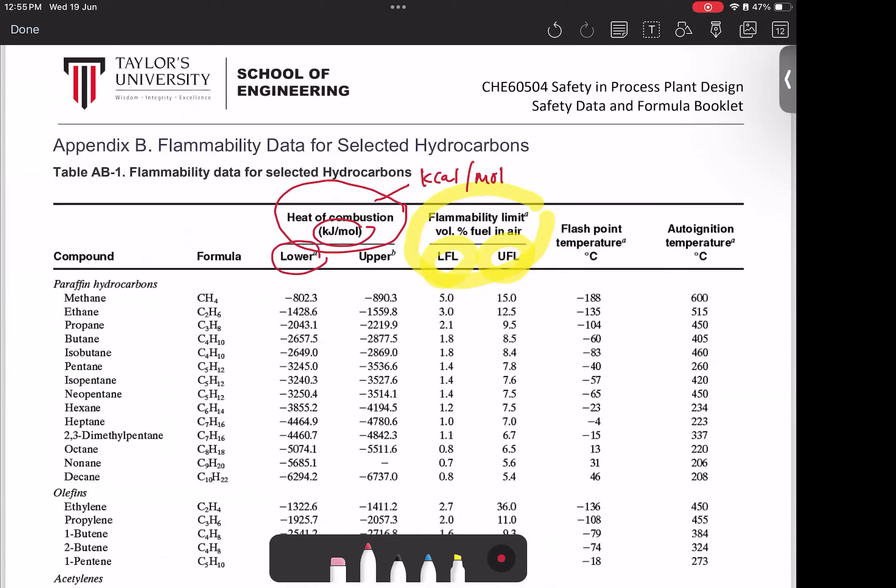So the question is, do we use the lower or upper level? For calculations here, most of the time we'll use the lower level. So why do we have two levels here? This is mainly because the study was done on two different scales, to study the arrangement between A to B. A is calculated by chemical properties by Carl, and B is the studies done by Suzuki. So there are two different studies - one done in 1999 and the other in 1994. In normal calculations we will just use the lower limit. However, if you want, you can use any value in between. But I would say don't give me a middle value - just either use this one or this value. Most of the time our calculation is based on the lower level. Any questions so far?

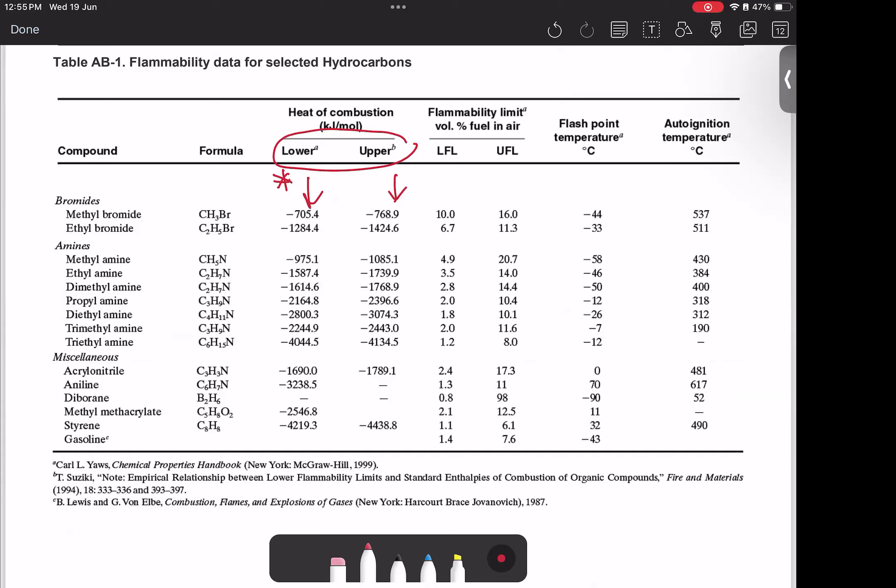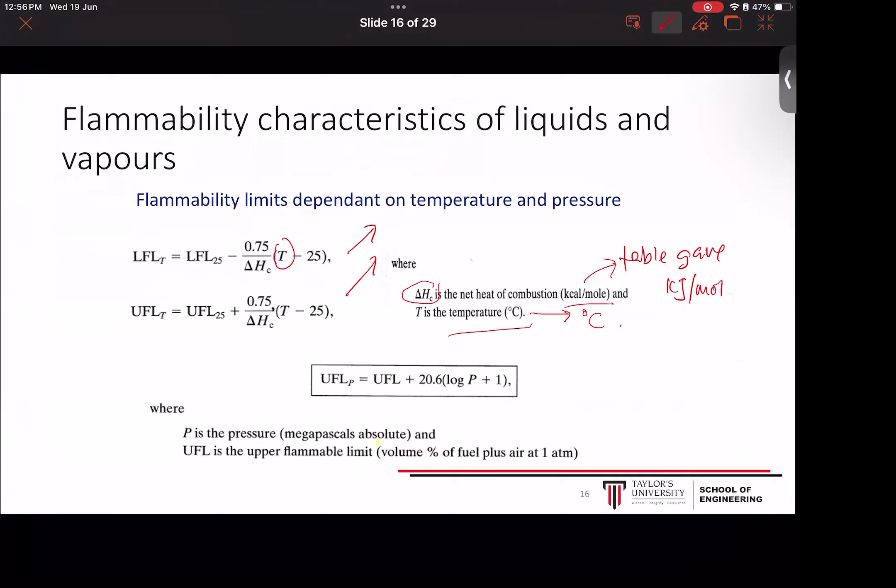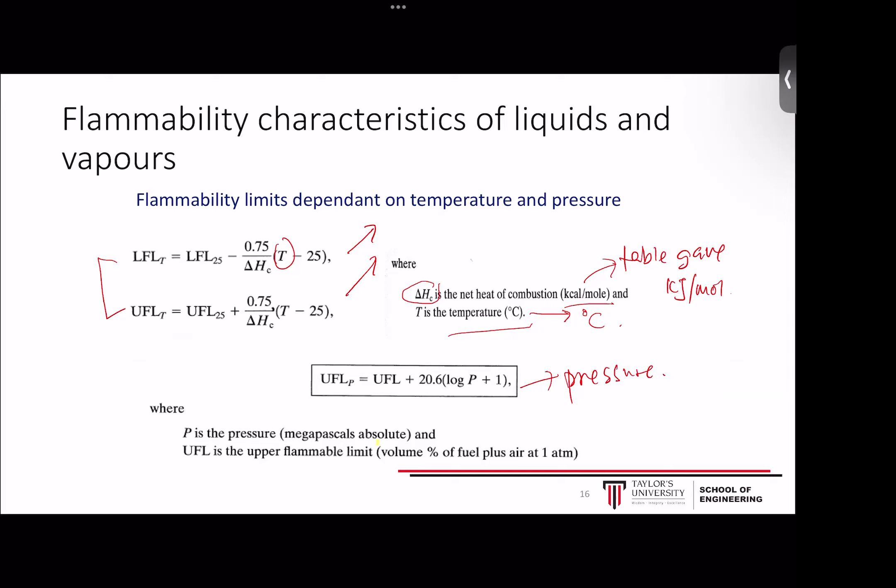So this is where we talk about kilocalories - remember you have to convert, because the table gives kilojoule per mole, so make sure you convert it. Then this is on temperature change, this is on pressure change. Pressure change will not affect the lower flammable limit, but it will actually increase the upper flammability limit. We'll take a look at that during the tutorials when we have calculations. So today we are not going to do calculations, we are just going to talk about theory. Calculations will be next week's tutorial. Any questions so far?

So if given the data you can't find the flammability limit in any of these tables - we have most substances here, but if you realize you don't have data for your substance, what we will do is go back to basics and use the stoichiometry of combustion of the fuel to calculate. So this is the generic formula, this is your fuel formula. You have to realize fuels will always have either carbon or hydrogen. If it's only oxygen we don't worry about that, and we also don't calculate other things like nitrogen, etc. So it's only hydrocarbon - you have H, you have C.

So once you have any combination of H and C, H or C—because hydrogen itself will burn also—you can use this formula to estimate your upper flammability limits and lower flammability limits. So this is the generic calculation.

So if you have, for example, methanol, where you have CH3OH, so you have 1 C, 4 H, and 1 O, then you just do the balance of these equations and you get this value. Your Z value is calculated by this whole thing. So you know your chemistry, right?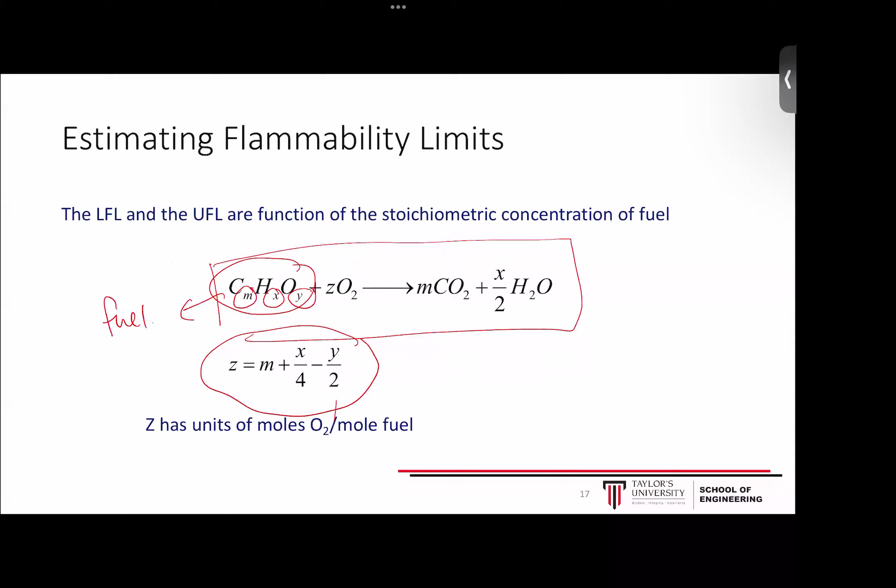So what you need to do is know what your chemical components are, substitute them in here, and you get your upper and lower flammability limit. Any questions so far?

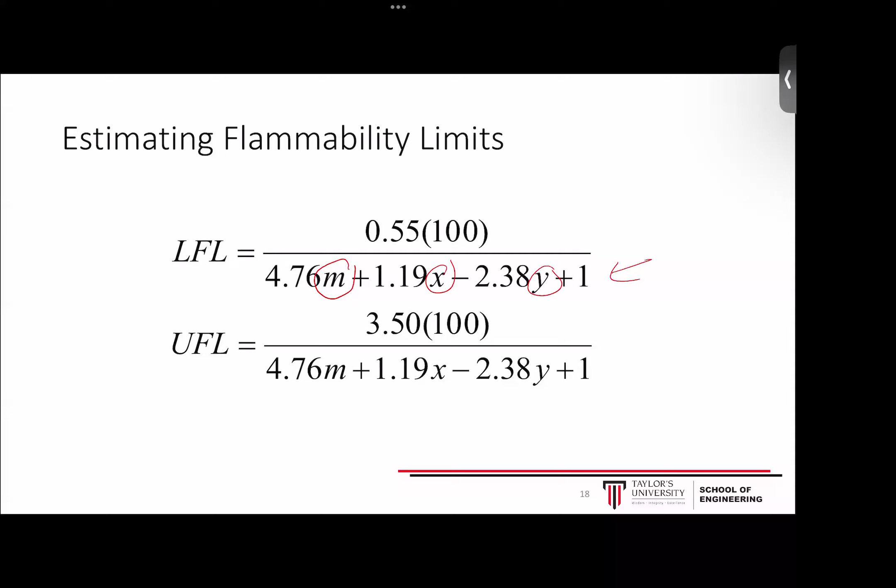So this is mainly to assist you when coming to next semester, where you need to do your stoichiometric calculations for your reaction. And then later on, when it comes to CEGP2, to the safety side, you need to recalculate what your flammability limit is, and you want to see how much chemical you can store, and what are the prevention methods from fire or explosions happening. So that will be in your CEGP2.

So in order for you to understand how to do all these calculations, the formulas are here. Any questions? Okay, so if not—we actually covered the calculations on the upper and lower flammability limit, but the actual calculation we'll only do together in class during the tutorial. That will help you understand how to use all this data. Today we only focus on theory.

So explosion behavior depends a lot on these parameters: what is the temperature, what is the pressure, what is the composition of your explosive material, and also the nature of your ignition source—the type, the energy, and the duration.

And of course the surrounding, be it a confined or unconfined situation—that will help you decide do you want to design a confined manufacturing plant or an unconfined manufacturing plant. The dust explosion we looked at was in a confined manufacturing plant because it's inside a building. So if they build their building correctly, with all this anti-explosive wall, or what we call the blast wall, the damage will be way smaller towards people. But towards the manufacturing itself, when explosion happens, whatever equipment or unit operations within that compound is all gone.

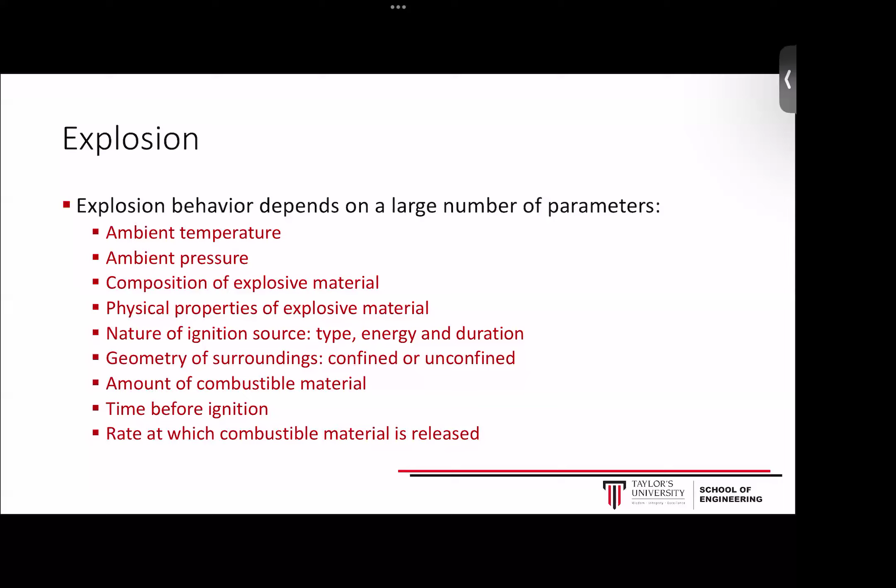Also the amount of combustible material—as you can see from both examples, the amounts are huge. Because in the first one, the chemical explosion, what happened is they basically increased the capacity of that reactor without resizing it and without restudying it. And the second one, they have this 300 foot silo of storage, and that whole plant is full of explosive dust. The time and also the rate at which combustible material is released—these are the things we need to study.

And the nature of explosions—there are a few different types of explosions here. One that we want to really be careful of is the vapor cloud explosion. Vapor cloud explosion is where there's a sudden release of a huge amount of flammable vapor, and its dispersion mixes with air, resulting in the vapor cloud.

A very good example of vapor cloud explosion lately—if any of you still remember, during the pandemic we had the Beirut port, where they had this fertilizer explosion. That is one of what we call the vapor cloud explosion, because there were chemical reactions, there was a fire at the site, and it was stored next to, and the fire happened next to the storage of this fertilizer.

Fertilizers are mainly a mix of two types of chemical components, nitrates, and mainly nitrates-based fertilizer. So when it comes with heat, the molecule wants to break into two different types of vapor chemical. One is ammonium gas, one is nitric oxide.

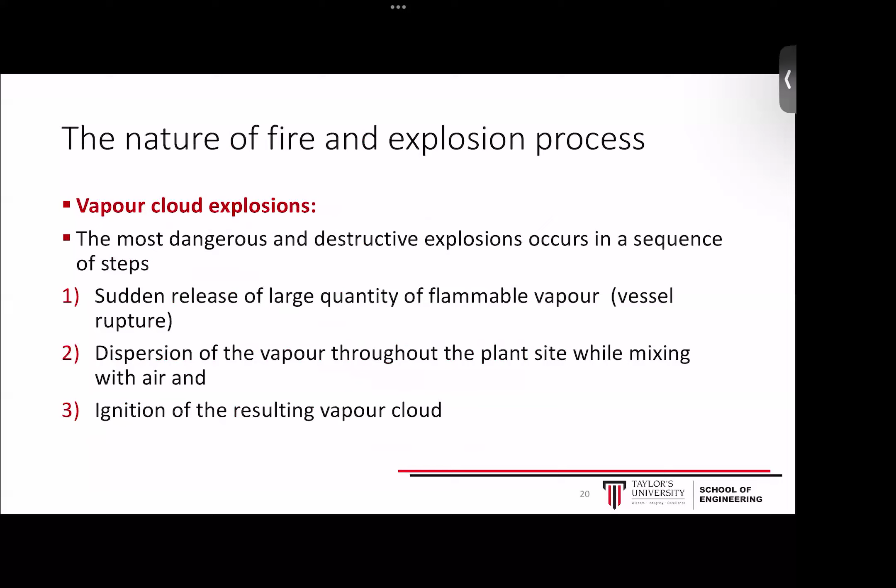In the Beirut explosions, what happened is when the fire started, the chemicals were basically boiling. It was being cooked in that high temperature, so the chemicals start wanting to break free from each other. When they have enough energy, it just breaks free, and with that it explodes spontaneously, causing the vapor cloud explosion that looks like what we call the mushroom explosion.

BLEVE, the boiling liquid expanding vapor explosion, is where vapor cloud explosions mainly release huge amounts of flammable vapor. BLEVE is where the tank itself is being heated up—very similar to the first one, yet different. This is mainly on the liquid itself, but the liquid has boiled and turned into gases, and the explosion happens because of mechanical failure, because the tank cannot take it anymore.

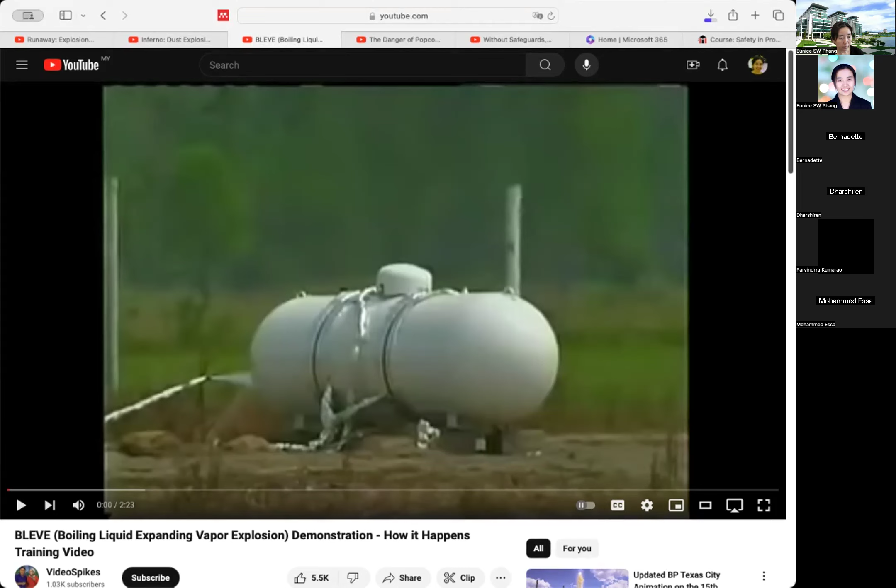When a tank is exposed to sustained heat, such as from a fire, the liquid within the tank is forced to boil or vaporize, resulting in increased pressure in the tank. To prevent overstressing the tank, the relief device activates, venting the excess pressure. As pressure decreases in the tank, the valve begins to close.

With continued heating... so in case you are not aware, just know there is a relief valve there, and that is spring loaded. So what happens is when the pressure goes up, the spring loaded relief kicks in and releases some of the pressure, and it continues to burn. Then the moment the pressure goes back to what we call the design pressure, it just sits back.

As pressure decreases in the tank, the valve begins to close. With continued heating, pressure again builds, causing the relief valve to reopen.

Where flames impinge on the tank below the liquid level, the liquid absorbs the heat, allowing the tank metal to remain at a safe temperature. With continued relief valve operation, the liquid level drops, exposing a greater area of the tank to the effects of heating. With the flames impinging on the vapor space of the tank, the temperature of the tank metal, uncooled by liquid, rises. At some point, due to the vapor pressure from within, the tank metal begins to weaken, stretch, and eventually tear. As the tank comes apart, large quantities of both liquid and vapor are released in a powerful explosion.

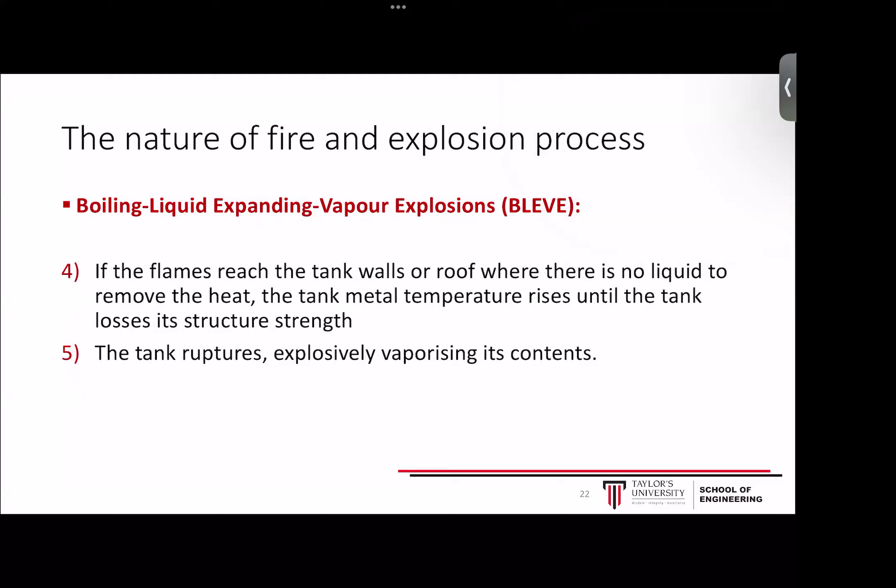With explosions, we normally estimate the blast damage from overpressure. After all the combustible material is consumed, the reaction is terminated, but the pressure continues in an outward motion. So the damage from explosion is actually more damaging than the fire. If there's a plant, as long as the fuel gets burned, it's contained within the plant, but with explosions things start moving all over the place, giving a larger damaging area. So it's the blast wave that causes most of the damage, not so much the fire.

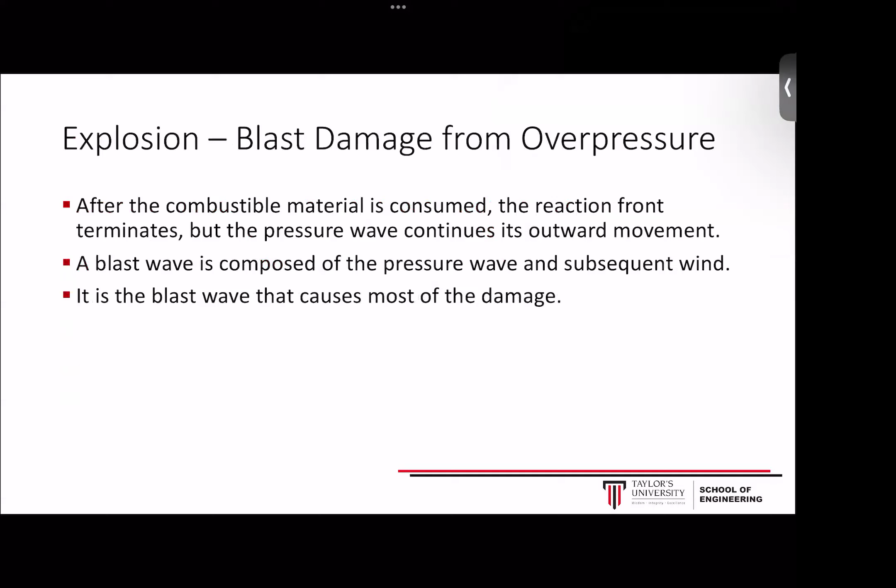If you recall the first explosion, the chemical explosion, the houses around it were damaged by all the flying debris. So these are another two explosions in the chemical plant, which I think I will upload in my times.

Later on, you all can view different fire explosions. All these are caused by different types of chemicals. The first one talks about the polymer, what we call popcorn polymer, which is basically the polymerization process in the chemical. The second one talks about the pressure vessel.

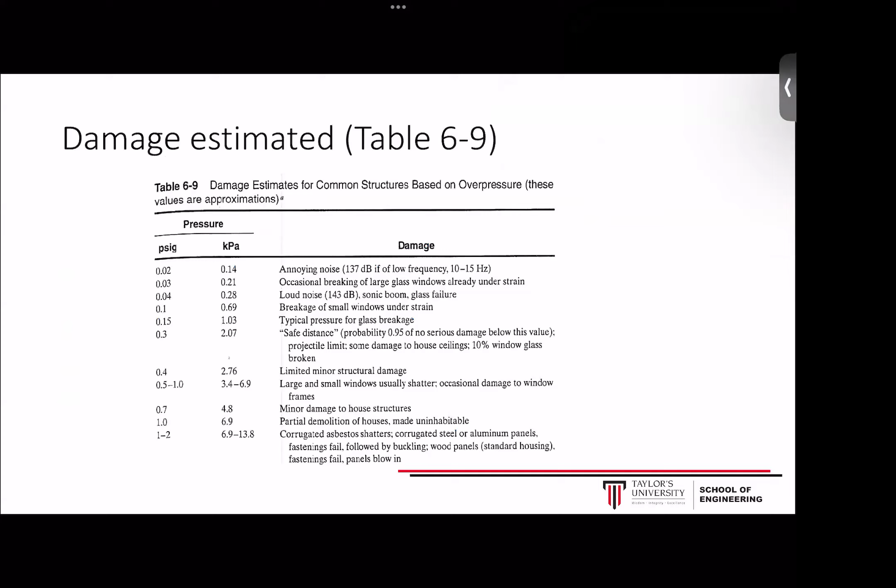What I want to introduce is that when we talk about blast damage, we often look at the pressures versus what is being damaged around it. So allow me to draw this. When a fire happens in the middle, assuming this is round, the explosion happens in all areas - top, bottom, and the side.

So what we need to do is know what is the damage within a certain distance from the blast zone towards this area, or if there are people somewhere here, what's the damage from the blast zone to here? This is what we call R, the distance.

This helps us design how much we can store in a chemical plant, or what is the safe distance for your chemical plant, because later when you do your plant design, the first chapter you need to study is your feasibility study, where you do site location - you need to decide where to put your chemical plant. Perhaps you want to build it in Kuantan, or Klang Valley, or Sabah, Sarawak, and so on. So you find a place to build your plant.

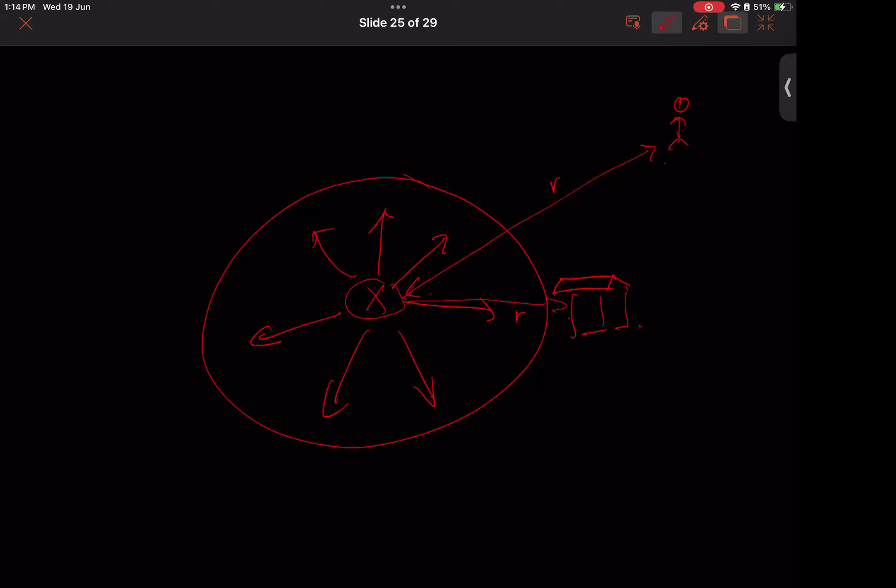But later, when it comes to the safety chapter, you have to revisit your site selection plan to see, okay, nearby, is there any housing area nearby, and is that within the safe distance?

So as you can see, when we talk about safe distance, there is what we call a safe distance for us to design, which is at the pressure 2.07 kilopascal, or if you use PSIG gauge, it will be 0.3.

So with this, when we say safe distance, it is where 95% of no serious damage occurs below this value. It's a projectile limit - some damage to the house ceiling, but it will not cause too much injury and so on. That's what we call safe distance, because we can't design it at zero.

When we design things at zero, everything cannot run. So that's where we always want to put a gauge. So what is the minimum that we can go to?

Remember, even in our chapters on toxicology, even the TWA, or when we talk about the Probit equations, we say 1% death rate, 0% - we use the lowest value, the 2.66, because 2.67 is 1%. So we assume 2.66 and below will be 0. That's a similar situation to what we call this safe distance.

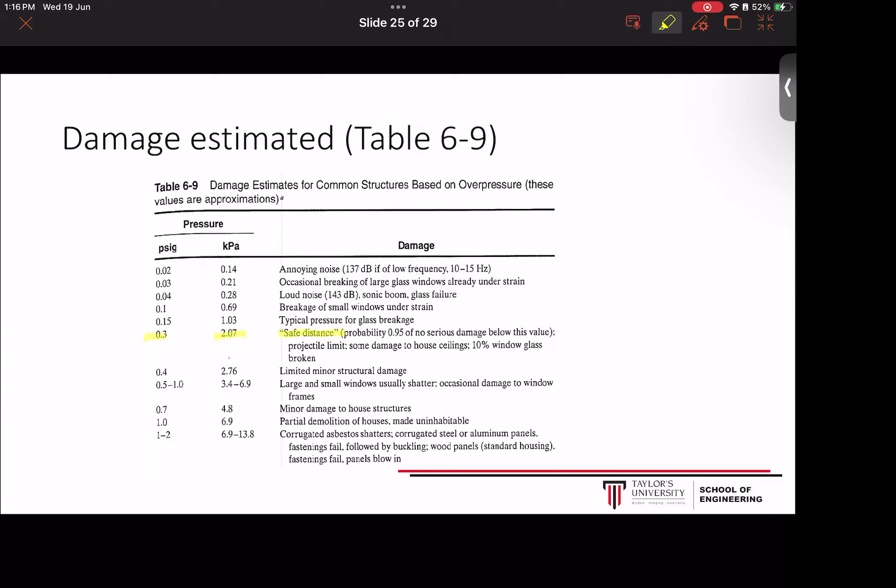So anything above this level, above this threshold, it will have higher damage. This is where the tables that we will refer to during your calculation come in. So again, let's see if I have any sample calculations to do - no, it's just an introduction of the formulas.

So whatever substance we have, all these chemicals, what we will do is convert them into TNT equivalents. TNT is the standard language that we use to know what is the blast damage. If you remember the two dust explosions as well as the chemical explosions, they actually talk about equivalence to how many tons of TNT being released. So in the calculations for fire and explosions, we always convert our chemicals to equivalent TNT by using this formula. So the TNT formulation is this one.

The equivalence of mass of TNT is the empirical explosion efficiency. Most of the time it will be given, or you can find it in some literature for different chemicals - they have different empirical explosion efficiency. For example, fertilizers is about 0.4.

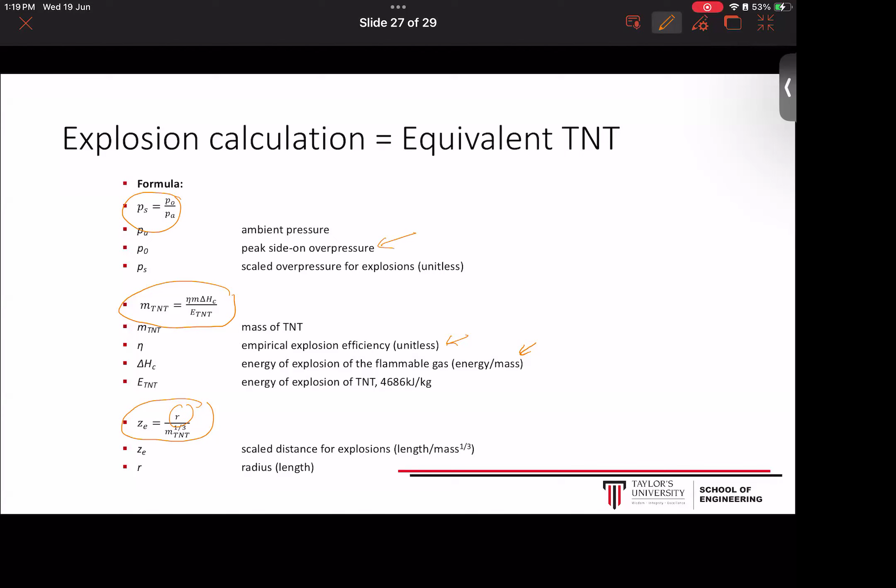So any questions about our class today? It looks like we have a quite short class today, because I'm not going through all the calculations in this class. So make sure you understand the theory, like how things happen and what is the difference between fire and explosions.